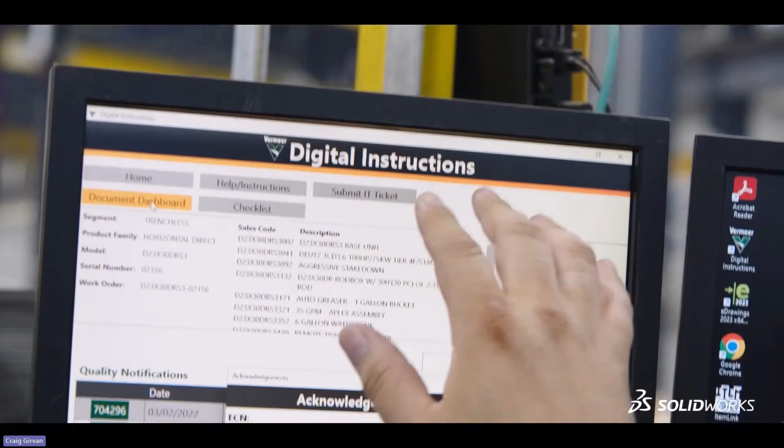When I started, it would have been '89, and drafting boards were the tool at the time at which we created our engineering drawings. Then we wanted to get into assembly drawings, and that's when we got into trouble. 2D collapses and falls apart. We'd have all the parts laid on top of each other, but that was only in one dimension. It's very common to design something up and then find out these parts don't even fit together. So how do we move to the next step? That's when we knew we had to start thinking in 3D.

It became, who are we going to team up with to move towards the next one? It became SOLIDWORKS. SOLIDWORKS was brought on board in 1999. We were the first SOLIDWORKS customer to have over 100 seats of SOLIDWORKS. The speed, comparing 2D to 3D, there's a huge difference there. We had to do overlays because we could only put 32K in one file. It didn't require the engineer to have so much imagination about how parts fit together.

It made the engineering job so much easier. When I saw SOLIDWORKS, I was like, this is going to completely change and revolutionize mechanical design. The ability and the power that has grown with it over time has really been nice, where before we could pull in a few parts, small assemblies, just because of the hardware limitations. Nowadays, I can pull in an entire machine of thousands of parts, and it runs quite well.

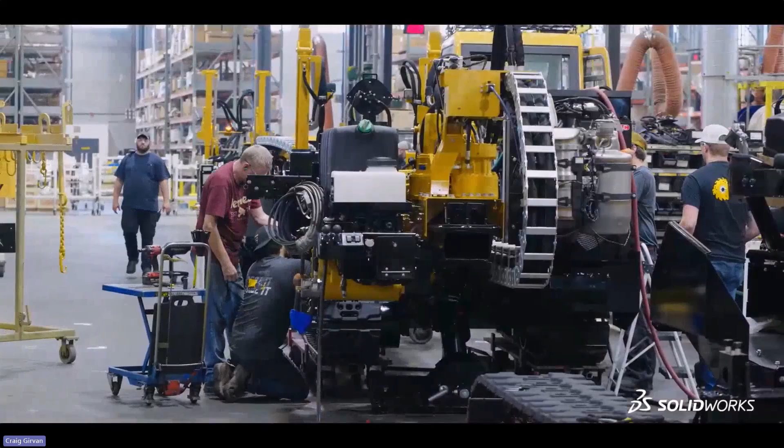We can model things, we can learn how things fit before we build the physical thing, which really accelerates our time frame. And that all was about how we communicate the complexity of our machines throughout the organization. That ability of SOLIDWORKS to bring things older, newer, more quickly, it just continues to accelerate. It allows us to offer repair parts. It allows us to keep designs similar from older and newer things rather than having to do a complete start over.

We can always use some amount of past data to help us with those future things. And now we're getting into the simulation type things, that confidence that if you have a design, you really understand what the loading's going to do to it, how the parts are going to fit together, you understand how they move together. That really allows you to focus on the actual engineering and designing things. Makes the job continue to be fun.

In July of 2018, we had an EF3 tornado. This one didn't stop. This one actually did hit. So we lost, I'm going to say, a third of our manufacturing square footage. And our goal was to actually get back up into production. Part of that was to find different manufacturing locations throughout the area. We were scattered out and about, and we were still able to function.

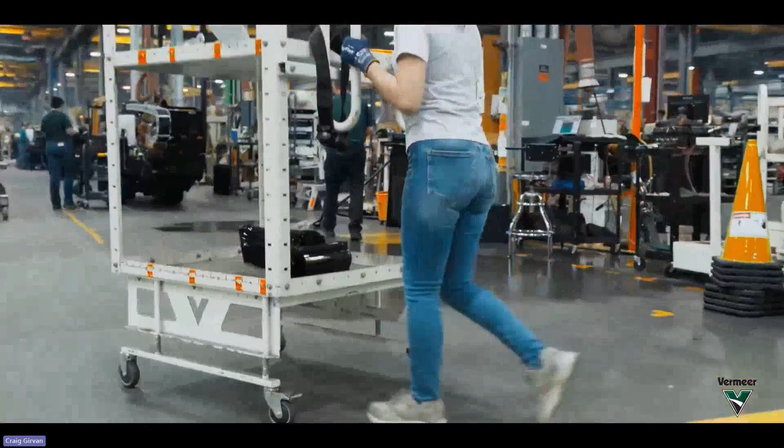We were back up into full production in 60 days. The year of the tornado, we had a record year. The backbone that we put in to run SOLIDWORKS, we were able to run it at any location. The partnership with SOLIDWORKS and Dassault Systèmes continues to grow. We would not be the company we are today without SOLIDWORKS.

It is used for 100% of all our mechanical CAD design, and we use it worldwide. Over the next 10 to 15 years, I expect the Vermeer SOLIDWORKS relationship to continue to grow, to solve new problems, to leverage new technology. The next generation can come and see the work of the past, and then we can keep absorbing and growing our knowledge base as a company.

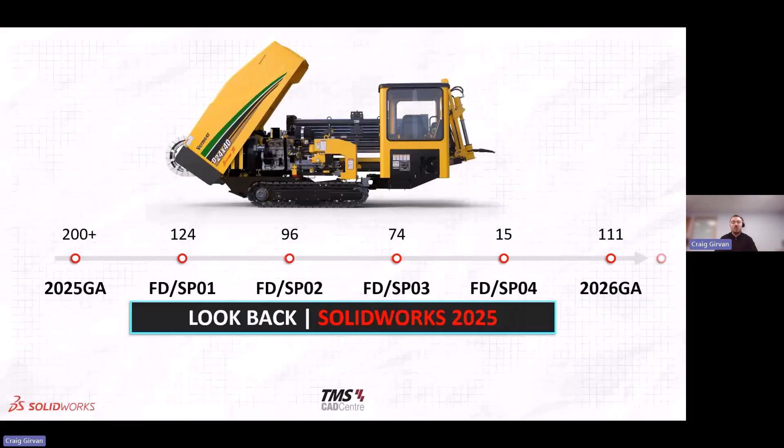For that we'll be using the model we used last year, so you'll be able to tell the difference between stuff added in 2026 versus 2025 - it will correspond to the different models we use throughout. We'll see the Vermeer model, and we're going to start laying things out a bit like a SolidWorks drawing, with a title block at the bottom right, a bill of materials for each section we go through today, and balloons showing what areas of the model we'll use for that section.

So getting started with the first section today, we're going to take a look at a highlighted feature. This was actually added in SolidWorks 2025, but it's one that came with one of the later service packs, so it's something we weren't quite able to showcase during the launch event a year ago when we initially showed 2025 - and that's all around the topic of selective loading.

There are three parts to this feature we're going to look at. First is accelerating the design workflow, particularly with large assemblies. Rather than having to open the large assembly fully resolved, which might take quite a bit of time, we'll see how we can open just a small sub-assembly or a selection of parts, which speeds up the process of opening what we need to edit.

We'll look at using some filtering tools, so we can create filters for those different sections and don't have to manually select them every single time we want to reuse this. And we'll also see how those filters can be used as part of governance, in terms of a workflow and tasks, that sort of idea.

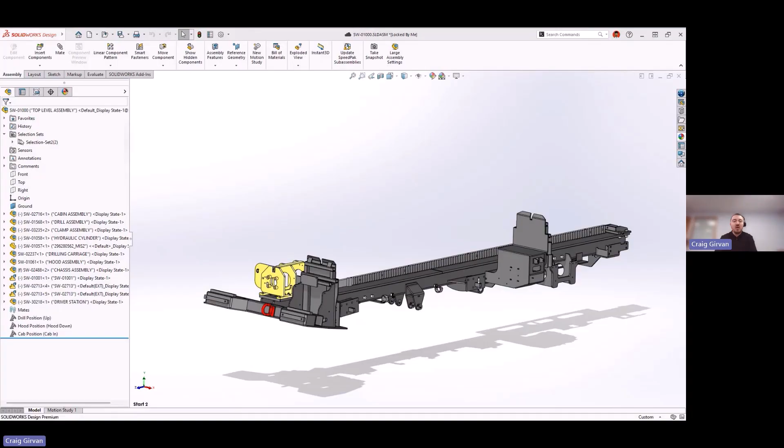We don't want any messages popping up saying we're missing a reference or anything's out of date. What we can do with the 3D Experience platform is create what's referred to as a filter. We can select the components, whether individual parts, sub-assemblies, or a mix of both, and apply them to a filter. That filter we can then also access from inside SolidWorks.

On the right hand side we can search for the name of that filter, and it will then just open up the components that were part of that filter, which makes the opening process much quicker, rather than having to load our whole model, but it won't have any issues with any references missing, that sort of idea. We can also start to apply additional information to that filter.

So we can add any sort of properties or attributes to that filter. We can modify the filters after they've been created. We can create multiple filters as well. And then we can use those filters as part of any collaborative tasks. So with the Experience platform, if we're using any tasks, we can have them included in there.

Same on the right hand side of SolidWorks, if we have our collaborative tasks open up, we can see what kind of work we've got to do, what work's in progress, and even what work's complete. We can link them to filters so that if we're passing that information to a colleague, they quickly know what files they need to open up and can open them up nice and quickly from inside there.

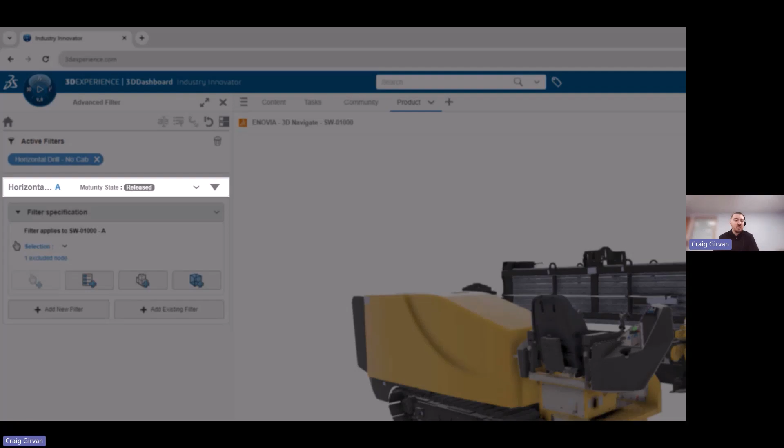And we can start to link them to our files as well. So if we want some kind of traceability to see what filters were maybe used in the creation of a drawing, if we looked at the relations in the 3D Experience platform, then the filter will appear as part of the relations, whether you're looking at a drawing or maybe an assembly. Those will still appear in there together.

So for those of us using the 3D Experience platform, that selective opening can be really useful when it comes to large assemblies and just working on individual components, rather than necessarily relying on things like configurations, which can still be very good and have their own benefits.

What I'll then do for the next section, we'll go through the parts. I'll pass it over to my colleague William, who will take us through that section.

Perfect. Thanks, Craig. So yeah, moving on to parts. We're just going to briefly cover what's new in parts in 2026.

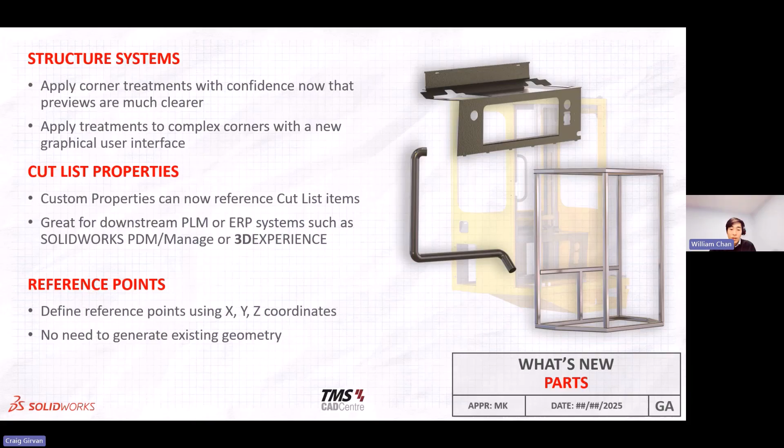You'll now be able to offset sheet metal base flanges from their original sketch plane. You can break both external and internal corners quickly, delete equations that would otherwise cause Feature Manager tree errors. There are also improved previews and user interface for corner treatments with structure systems, and you can leverage cut list properties for PLM and ERP systems, define reference points using numerical X, Y, and Z values, and finally specify bounding box directions using coordinate systems for greater control.

Let's have a look at these in action, starting off with base flanges. Normally with sheet metal, base flanges are extruded from the sketch plane. However, in some cases it might be useful to offset the sheet metal base flange from the plane it was originally sketched on. So in 2026, what it allows you to do is offset that base flange by a specified amount, or by a vertex, or even by a surface, face, or plane. This gives you more flexibility when creating sheet metal parts.

Next is break corners. You've always been able to break exterior corners - just select the break corner tool and select all corners to apply chamfer or filleted treatments. 2026 now expands this functionality to internal corners, making the treatment of sharp internal corners much simpler.

Next is delete with equations. Equations in SolidWorks are used in features and sketches to create links or conditions to dimensions that would otherwise normally be impossible. However, when you deleted a feature containing equations, the equations would be left dangling, causing errors in the design tree. With 2026, you can now simply select the delete equations checkbox to automatically delete those without errors.

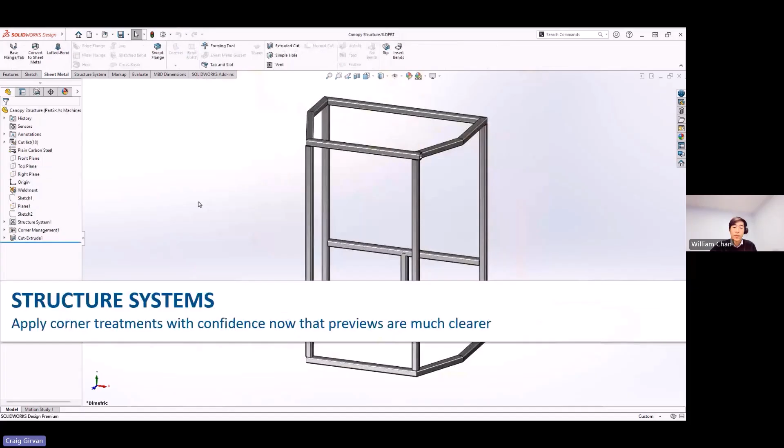Next thing is structure systems. In SOLIDWORKS Design 2026, structure system corner treatments are more consistently colored to indicate the corner type. Now when you select a complex corner to modify, there's a brand new graphical selection pane that appears, giving you complete and intuitive control of the corner treatment with better previews than before.

Next are cut list properties. Cut lists gather all bodies for easy categorization and the creation of your bill of materials. However, maybe it's difficult to access this information for downstream workflows such as SOLIDWORKS PDM, the 3D Experience platform, or any other PDM, PLM, or ERP system. In 2026, it enables you to reference cut list properties such as description, total length, and more within the custom properties, making this information more easily accessible without having to rely on workarounds.

Next are reference points. In the past, you would need existing geometry to create reference points. In 2026, you can now define the position of reference points using numeric X, Y, and Z values. Here we can see they are being used to generate a layout for what would have otherwise been a challenging 3D sketch, which is then used as the path for a sweep feature.

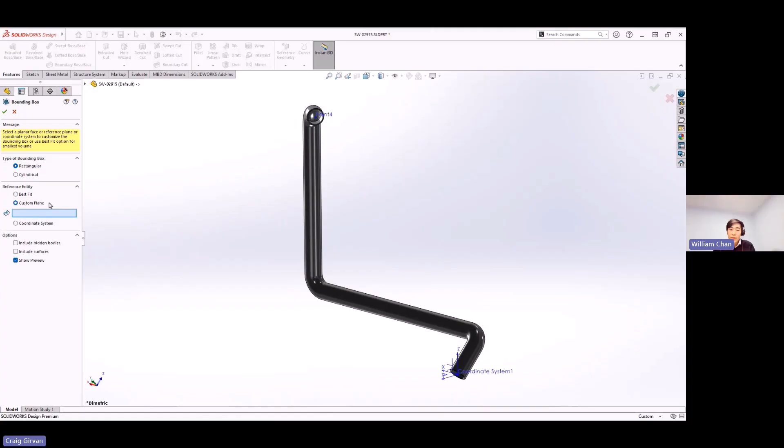Next are bounding boxes. Sometimes it may be beneficial to orientate the bounding box along a specific plane. However, if the part geometry changes significantly, SOLIDWORKS may change the direction, which is defined by length, width, or thickness. So now in 2026, you can specify these directions based on a user-defined coordinate system. That means the defined direction X, Y, or Z will always associate with the bounding box definition. For example, the bounding box width defined by X direction is 33 inches, greater than the length of 30 inches. When we change the part configuration to the shorter length, the bounding box width is now 27 inches, while the bounding box length is maintained at 30 inches, and it essentially did not swap due to the change in geometry.

Now we're just going to have a look back at some of the features that came out in 2025 for its various service packs. In 2025 FD01, we had the ability to set the flange length to a specified vertex, include DIMXPERT dimensions with library features, and add attributes when you create a new SOLIDWORKS file. Let's have a look at these in action.

Starting off with the edge flange. In 2025 FD01, the edge flange tool introduced the option to set the edge flange length by distance to a selected vertex. Selecting the edges of the part to start the edge flange, then using the up-to-vertex option allows you to choose a point on a sketch or geometry. The edge flange no longer requires a dimension value and is controlled by the position of the vertex.

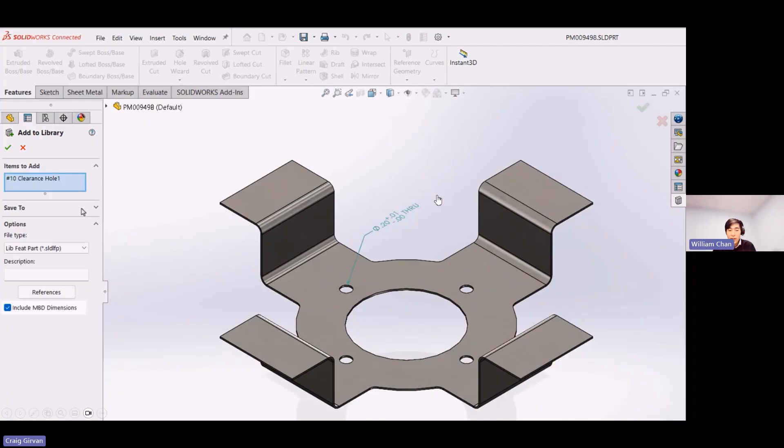Next is adding a design library feature. This now gives the option to include MBD dimensions when you're creating a library feature. This saves a couple of clicks and allows you to essentially reuse that library feature in other models. For example, once we've added this, we can insert it into a model, and we should see the MBD dimensions also appear once those have been inserted.

Next, in 2025 FD01, we have the ability to set a template from the 3D Experience tab, allowing you to enter the value of attributes before the file is created. So here, for example, we can set the description, make or buy, as well as the finish required. These values will populate the file properties and can be viewed in the various 3D Experience platform apps.

Next, in 25 FD02, we saw pinning commands such as the fillet and chamfer tools, the shift key to establish equal length relations, and multi-language support with design tables. Let's have a look at these in action.

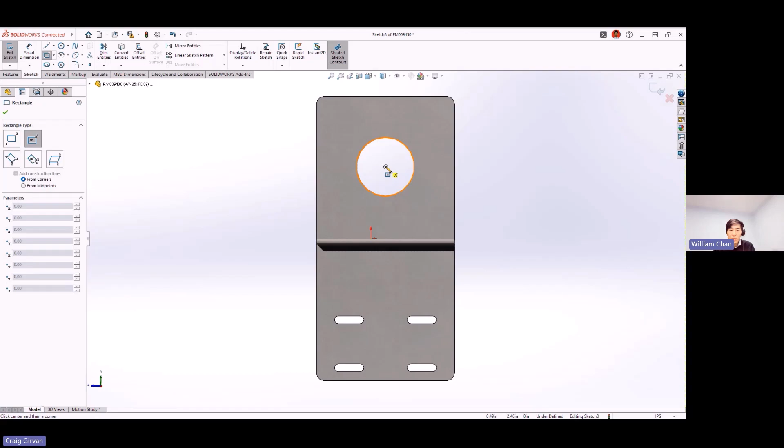Next are sketch squares. Let's first create a sketch and activate the rectangle tool, and sketch out the rectangle. When placing the rectangle onto the sketch, you can now hold the Shift key to establish equal length relations. This creates a square shape and saves you having to apply the equal relations after the sketch is placed.

Finally, we have multi-language support for design tables. If SOLIDWORKS detects the column headers in the design table are in a different language compared to the default one set on your SOLIDWORKS installation, it will display a prompt giving you the option to either translate or not translate the column headers, as we can see here. Selecting the translate option will translate and match the column headers to the same language currently set in the installation. And that is what's new with parts.

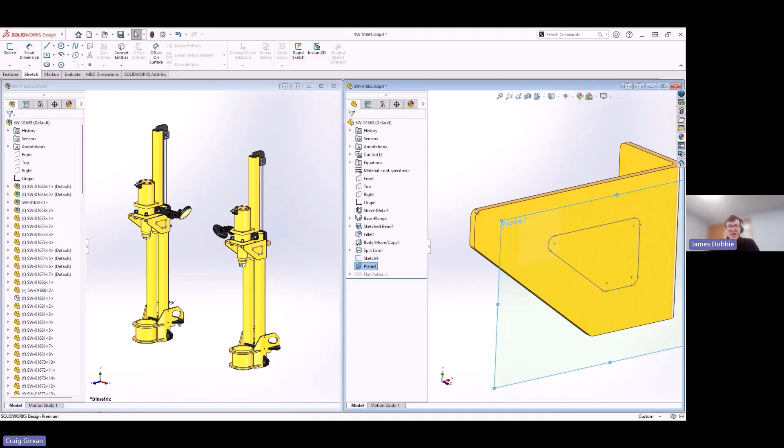When we apply this and make changes to things like the parts within the assembly, it will not mark the assembly as dirty in terms of needing a rebuild and save. In this case, in the part, we're moving around sketch planes which don't require any child features, adjusting the sketches, hiding them, adding appearances, and things will still work. This plane didn't have any child features, so it's not actually changing the part at all. None of this is affecting the assembly, and that's why it's maintaining the square bracket indicator, showing only a cosmetic change being applied.

If we go in and adjust appearances at the part level, it still maintains that cosmetic change indicator. However, if we make changes to the part and then cancel them out, still no changes have occurred, showing that no-change indicator again. So it doesn't necessarily need to be saved when you're finished, saving rebuild and save times on large assemblies.

Next is enhancements to tables, for managing display states and configurations. There are new dropdowns added to tidy up the table by default, such as the reference display state being hidden by default, and configurations get the same treatment. So here we can turn them on and off as required for display states.

In configurations, usually when you add parts it will add three columns: suppressed, configuration, and fixed. By default, it will just bring in suppressed, but if you want access to those other columns, you can add them on, or add and delete them as required. That's the new enhancements to configuration display state tables.

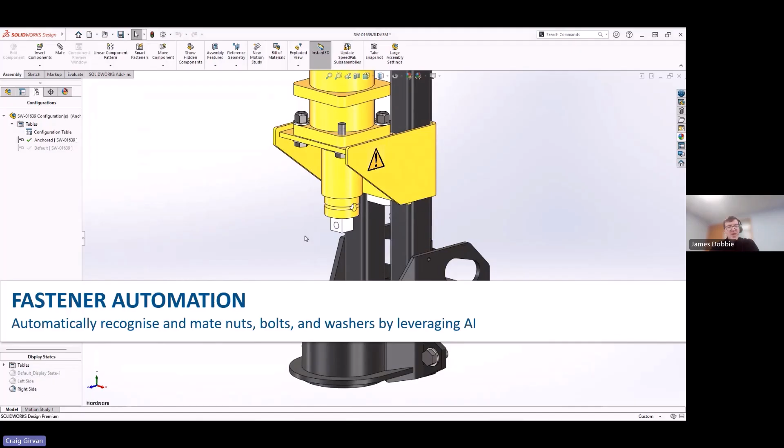Next up is automation in terms of fasteners. This takes parts that are not toolbox parts and makes them behave somewhat like toolbox parts, automatically mating them in position when dragged over appropriate geometry. In this case, the fasteners can just be dragged around even though they aren't toolbox parts, and it also works when dragging them in from outside SOLIDWORKS.

How this works is SOLIDWORKS has been trained on thousands and thousands of Windows preview images to detect what is a fastener, so that's how it knows what a fastener is just by looking at the Windows preview image. So you can drag them in and easily place them if you've got them from somewhere else, like an online website or anywhere else.

That's what's new in 26. We'll now look back to what was added in the various service packs in 25.

So here, the disable auto resolve option in the feature manager tree. This applies when you've opened an assembly in lightweight mode. The previous behavior, which we'll see here, is when you open a sub-assembly, it's then going to resolve that sub-assembly, and if you want to drill down the tree, you might have several resolve steps to wait through.

There's a new option you can disable, the auto resolve option, which will change the behavior so it no longer auto resolves all these sub-assemblies as we expand the tree. If we take a look at another one of these, for example, it is not resolving that, allowing us to browse through our tree nice and quickly. It only loads what's in lightweight, but if any of these parts or sub-assemblies need resolving, we can just right click on them and resolve them.

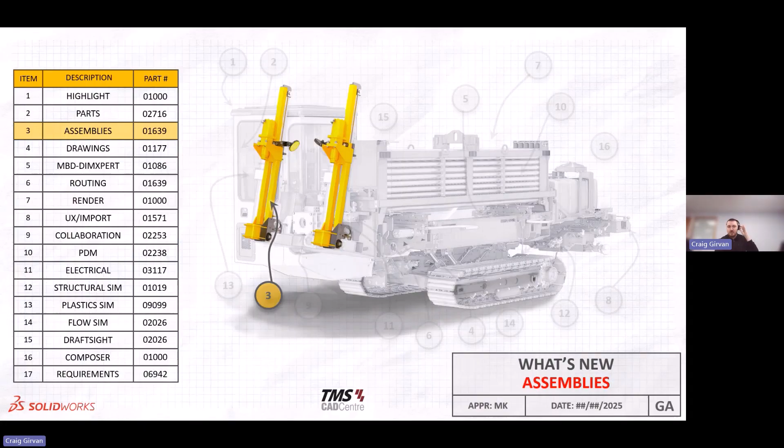So what I'll do is take us through some of the enhancements to the SOLIDWORKS side of things when it comes to the drawing environment. First we'll look at an example using auto-generate drawings, where we'll use a little bit of AI to automate the process of creating drawings, intelligent in terms of where it places things and what it places. We'll then look at enhancements to magnetic lines, where it doesn't have to only be used for balloons, which is what it was originally made for. We'll then look at an enhancement to breaking dimension lines to tidy things up when things might overlap slightly, increasing the readability of our drawings. We'll then look at a change where we can have custom text when it comes to geometric tolerance and the frames and fields in there. We'll then have a slight enhancement to the surface finish indicators depending on what standard you're using.

Having a look at the first example here, we've got the auto-generate drawings. There might be an example where we've got a number of different parts and we need a handful of different drawings created for those individual components. What we can do, using the 3D Experience platform, is have SOLIDWORKS create those drawings automatically in the background. This will appear as a section on the right hand side, and as you continue to work on other models or completely different files, SOLIDWORKS can generate those drawings.

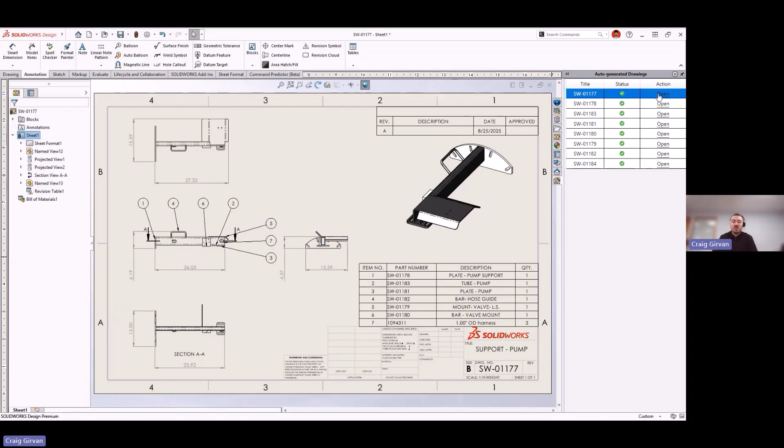Magnetic lines were introduced a number of years ago and were initially created to help with balloons, so we could add balloons to the magnetic lines. However, now with 2026, we can start to add pretty much any of our different annotations in our drawing, whether it be datums, basic notes, surface finish symbols, geometric tolerances, pretty much any annotation. We can attach them to those magnetic lines or pull them apart just as we would with balloons.

The next enhancement is the option to break dimension lines. It's relatively common in a SOLIDWORKS drawing, particularly with lots of dimensions, that some might overlap. But now we can break that, and as we start to move this dimension around, if it would overlap another dimension, it will start to break those lines a little bit. If we add a new dimension, we can simply update, and any points where a line should be broken, SOLIDWORKS can add that broken line in to increase readability and make things look neater and tidier in our drawing.

When it comes to geometric tolerances, if we go in and create our geometric tolerance and place that next to what we want, we'll see a wizard where we can add the various steps. We can then start to add our different frames, so we might add additional frames for our three different datums, but now we can add additional text linked to that geometric tolerance. Here we've placed some additional information below, which could easily be placed above or to the side. It just allows us to add some additional text, whatever we want in there.

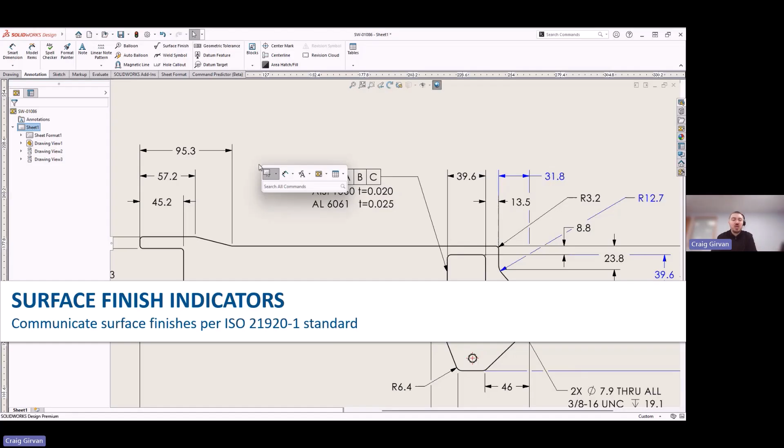We also have a change to the surface finish symbols. Based on our new option here, we'll have a new option to choose the standard for our annotations for surface finishes. From the drop down, it's been updated to a slightly newer standard, so we can select that from there, and when we go to add any surface finish symbols, the symbols shown will be updated and we can use the new options available.

So we can add that there, and then we can attach that to where it should be placed. It's just an update to the options that we've got based on some updated standards inside SOLIDWORKS.

What we'll then look at is a couple of enhancements that came with SOLIDWORKS 2025.

With FD01, we had an option for flattened bill of materials, where we can show the total quantities for those. The bill of materials can also be affected by the display states if we're using them, so if we have anything hidden out. And then we have a new table type called a family table that we can add in.

Having a look at the flattened BOM, here we've got a couple of components that are currently indented, in terms of having a kind of 5.1, 5.2. If we change that to the flattened option, it will not only flatten it so we don't have the .1, .2 and increase the numbers slightly, but it'll start to see how many of those components are in any of our assemblies anywhere, and include the total quantities of those.

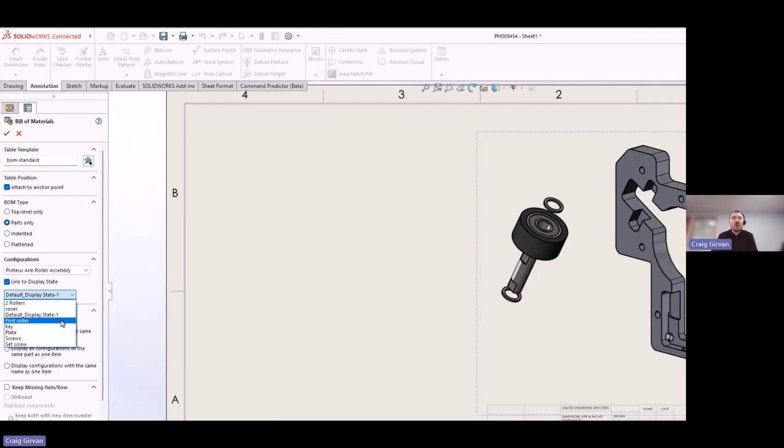If in our models we have display states, we could select a different display state which will hide out a couple of our components that may be created in our assembly. When we now go to create our bill of materials, we'll have an option to link that bill of materials to a display state. That way it's not going to try and add in rows to the bill of materials for any components that are hidden out in that display state, which subsequently means if we added in some balloons, it's not going to add in any additional balloons that might have a little question mark or star but doesn't know where to put the leader line. That's a nice option there.

What we then have is a new type of table referred to as a family table. In this part we've got 4 different configurations, and those have slightly different diameters in this case, but it could be different lengths or really any dimension that's changing. If we come to our drawing and insert our family table, it will add in a row for each of the different configurations, and any time there's information changing, it can have columns for that. So in this case the length and diameter are changing.

Technically in the background, we also have a part number assigned in the configuration properties, and the configuration properties have a different description for each of those as well. So we can just have columns shown for it, which can be a nice easy way to show all of different information from our tables.

With FD02 we had some changes to the cut lists. We also had some display expression changes in terms of visibility and how we can hide and show certain stuff, and an enhancement to revision tables.

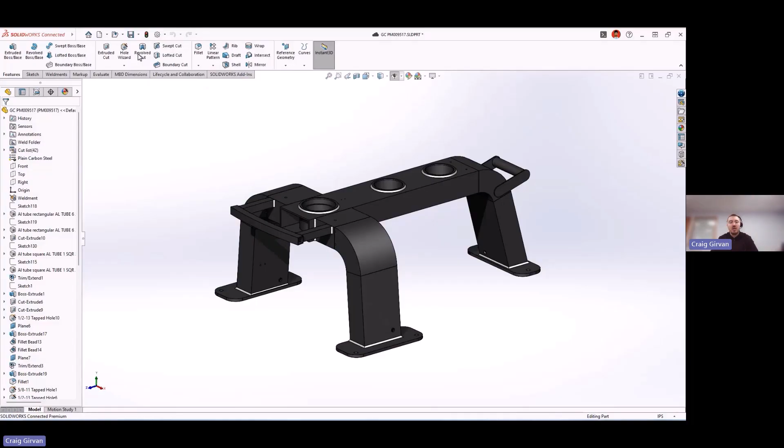When it comes to weldments and sheet metal, we normally have our cut list. In here we've got a number of different lengths, but depending on what units we use, you could have ended up with a table where some units are shown in millimeters, some bits maybe shown in inches, or centimeters. But here we'll have a new option where we can say to always use our document properties and the units that are part of our document properties.

That way, when we go back to our drawing, any information that we've had from cut list IDs will match what the length is. So we've got the same units being used throughout the drawing, so we don't have any discrepancies there. Also, we have some changes to controlling the visibility of some annotations.

So what I've got down here at the bottom right is part of our title block. Normally we might have various different notes in there, but without editing the sheet format, it might not be possible to see if there's actually a note in there, or if it's just that I've not put in who drew the file or when, or if the note's kind of broken and someone's deleted it. With this new option, we can show in the drawing if there would be a note in there, depending on whether we're pulling information from the model or from the drawing, or if it's a $PRP sheet property, it will start to show us. Then we can look at where that's pulling from to see the reason for any information being blank.

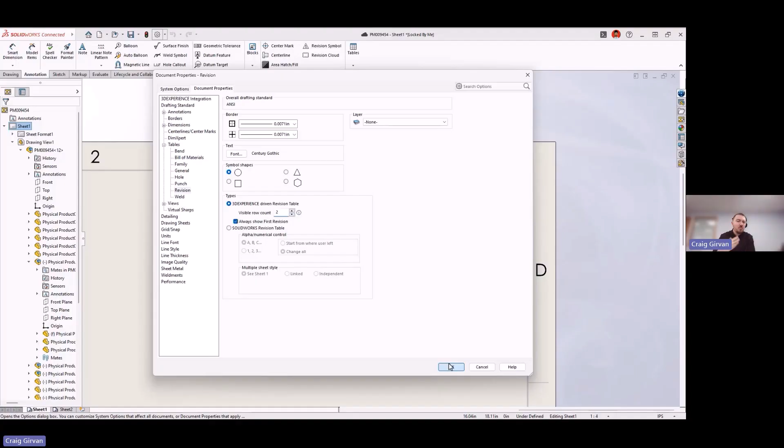We then have an option for the revision tables side of things. This option is specific to those of us using the 3D Experience platform. We can have the revision table always show a row for the initial revision, so we can say always show the first revision, and we can control how many total rows we want to see. In this case we see A, because that was the first one, and if we're only showing 2 maximum, we'll have that first row plus whatever the latest revision is, which in this case is E, which could then change to F and so on. A nice wee enhancement there.

I know a couple of our customers had actually been asking for that.

For the next little section on MBD, we'll stick with myself. We'll look at a couple of wee changes to the MBD side of things, which will more closely match what we're familiar with in other areas of SOLIDWORKS when it comes to hide and show annotations, and we'll also have a little change to the filters we can use for those annotations.

So with our part here, we've got a number of different annotations added in. We can hide and show those annotations in the same way we could in, for example, a SOLIDWORKS drawing. When we select that hide and show option, anything that's been hidden will be shown in a light grey colour, and simply clicking on those will re-show the annotations. That's where we more closely match what we're used to with drawings.

If we wanted to create an MBD, model-based definition, we can also start to use filters. If we change on the left to our DimXpert tab, we'll now have a filter option where we can type in the name of an annotation or a type of annotation. For example, we could search for the start of the word radius and get any of those values appear, or type in the word position to get any of the position annotations we've added in. So just two wee simple enhancements there when it comes to the MBD side of things.

So what I'll do is pass it over to my colleague, who will take us through the routing side of things.

Perfect, thank you Craig. So I'm going to now take you to routing. In 2026, for routing, we have an improved and streamlined user interface for pipe and tube coverings, which now has reusable favorites and the ability to use sketching as routing guidelines for auto route. Then finally, enhancements to drawings where views, tables and annotations can automatically adjust when the sheet format has changed.

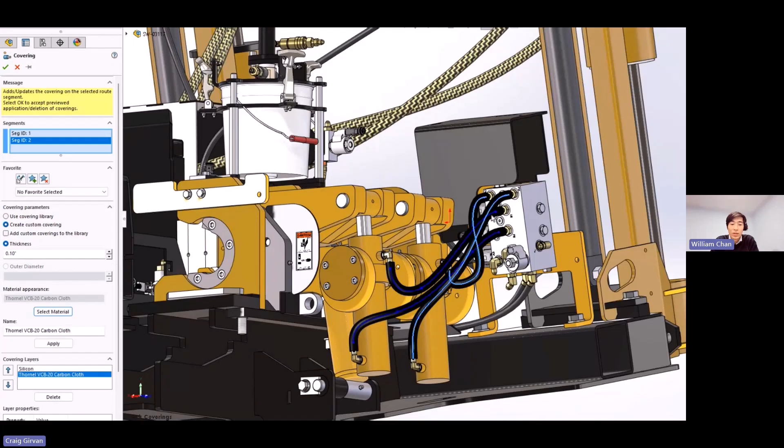Let's have a look at these in action, starting with the streamlined user interface for pipe and tube coverings. By editing the route and using the coverings command, you can apply either the out-of-box layers or create your own using the materials library. Once you've defined the cover material and layer thickness and applied it to the segments of the route, in 26 you will have the ability to save that as a group using the favorites drop-down menu in the covering property manager. This makes applying covers easier than before, allowing you to reuse the same settings and apply them to other existing routes. For example, we can edit this existing route, select the hoses, and then use the group named Vermeer that we just created.

And just select that from our favorites drop-down menu.

Next is sketch guided auto routes, for electrical routing. With an assembly of this scale, and like in many similar assemblies with a variety of motions, it's important to keep the wires, cables, and harnesses neatly organized. As you all know, we have the auto route functionality, and it does save a tremendous amount of time.

In 2026, with the auto route tool, we now have the ability to use guidelines to follow a sketch that defines the path of the route. With the electrical components and connection points established from a from-to list, we can create a 3D sketch that drives the route, and then use that guideline option to follow the sketch, which helps organize the wires, cables, and harnesses within that route.

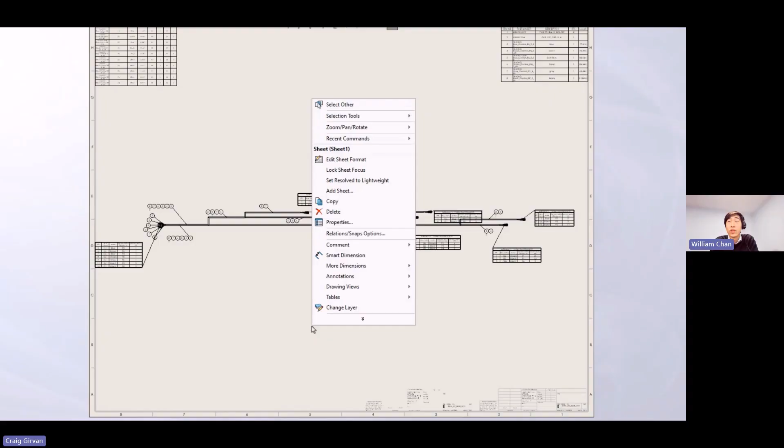Finally, we have sheet formats with routing drawings. When detailing a flattened electrical route, it is often necessary to adjust the size of the drawing. There might be many tables, annotations, and dimensions, and we may run out of space within the drawing sheet. This is often done by either rescaling the views or adjusting the sheet format to a different size.

In 2026, we can now navigate or switch to a different sheet format while the drawing maintains the proper size and ratio of all views, tables, and annotations. Everything shifts proportionally. We might just need to move some items around to adjust to the new sheet size of the drawing, but we don't have to modify the scales.

And that's it for routing. I'll now pass you over to Craig.

Alright, thanks for that, William. What I'll do is take us through a couple of enhancements when it comes to the rendering side of things. You might notice the topic here just refers to it as rendering rather than necessarily visualize, because some of the enhancements we'll look at aren't necessarily in visualize.

So we've got some changes inside SOLIDWORKS to use the DSPBR appearances that were previously added into visualize. We'll now also have an option where we can start to actually create visualize renders inside the SOLIDWORKS application itself. And for the visualize side of things, for those of us with AMD graphics cards, we'll now have the kind of stellar fast mode, which can help keep things looking the way we want, but also with improved performance.

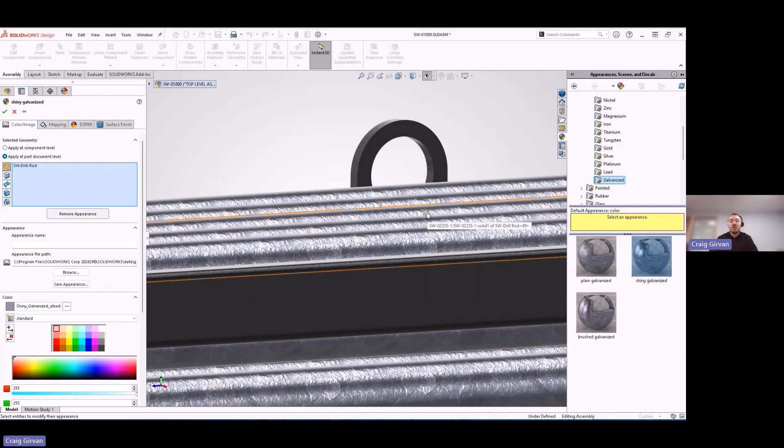So first, when it comes to the DSPBR appearances, these were added into visualize a couple of years ago, but now we've got them inside SOLIDWORKS. So what we can start to do is, as we apply our various different appearances, or if we apply a material, all our materials in the materials database in SOLIDWORKS come with appearances as well. Those have all been updated, so that when we look at things, they should start to look a little bit more realistic, which can give us some better visuals.

But taking those visuals, if we were to try and take just a snip of those, it's still maybe not the ideal option. So that's where we'll start to use the second enhancement here, where we can create renders inside SOLIDWORKS. Some of you a number of years ago might have been familiar with PhotoView 360, which stopped being supported really from 2017, so a good number of years now.

What I've got now inside SOLIDWORKS is the visualize render side of things. So without leaving the SOLIDWORKS application, we can apply all those DSPBR appearances, maybe add a couple of bits of lighting, maybe add a scene in the background, and then start to get much more realistic images that we want to put on our website, use for marketing material, or maybe send to a client to show what their model would look like.

And this is kind of one example of one of the results that we could get from there. So that's something that can definitely help, I think, a lot of customers, rather than just using the window snipping tool, which I think a lot of people still use.

Last enhancement here we'll look at is the stellar fast render mode. For those of us that had NVIDIA graphics cards, we'll maybe be familiar with this. Obviously those of us with an AMD graphics card will now have the render mode at the top, where we see the little yellow circle at the top. That means we don't have to use the fast mode, which then you would see all your cameras and some other stuff, and things won't necessarily look the best in the fast mode.

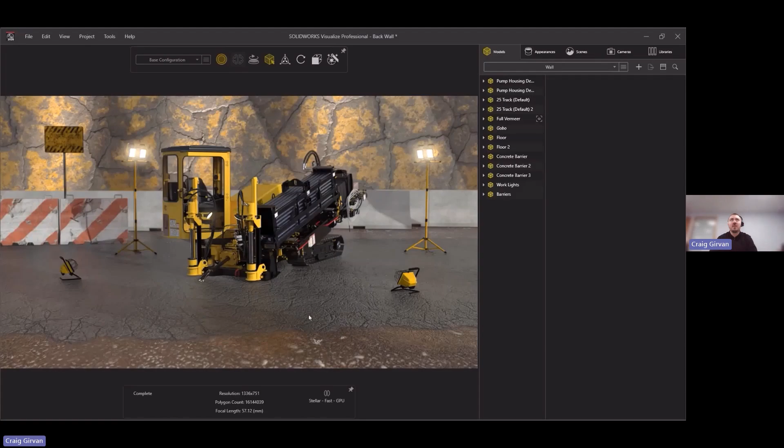You also don't need to go all the way to the accurate mode, where everything's fully rendered and therefore a bit slower. We have that middle ground which can help with the setup, and then you can do your final render at the end. So that's a couple of enhancements when it comes to rendering with SOLIDWORKS.

The next section we're going to look at is the user experience and import. First of all, a new option here is to import models in a background process. So if you've got a lot of neutral files, rather than locking up SOLIDWORKS while you're importing, you can have those import in the background, and once they're ready it'll give you a wee notification to start using them.

There's also been improvements to the filters. This is where you can bring up the filter selection in terms of edges and vertices. You now have options for components and features as well to make selections. So let's take a look at those and some more.

There's also options for selections, such as body selection filtering by things like size or within a defined volume. The warning messages that you get at various times when you've got errors or other issues opening files - if you have previously dismissed them, there'll be a wee pop-up in the bottom right if any were to show up. And there's also been improvements to the rebuild performance for more complex assemblies.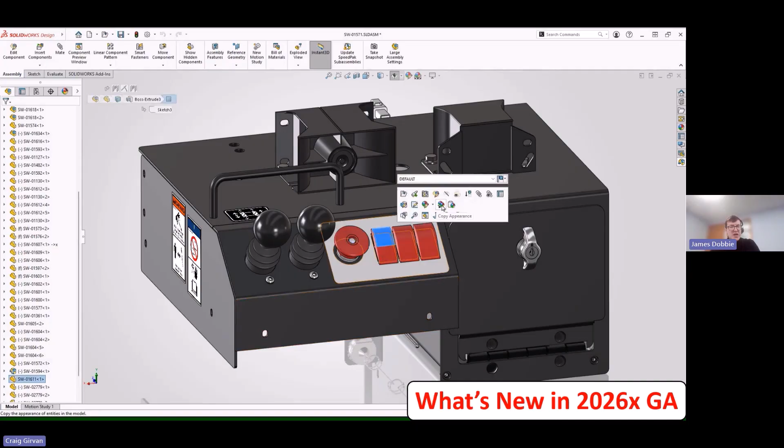Now in terms of if we want to select these joysticks and buttons, we want to apply appearances to them. Let's say we want to apply the red appearance to the entire component - previously we'd have to select that component, then go into the appearance options and make sure we select the entire component. Now what we'll be able to do is just filter for the component selection, and by selecting this will pick either the top level subassembly, or if the part is just in itself, the whole part, and we can apply appearances and other options much quicker by that filter selection.

It's the same in parts with features as well, which we'll look at next. Just that filter menu you can bring up with the F5 key. So we'll look at the same in parts now.

So opening up this part here, the new option for features - it might be a case that you want to make a selection on features to either apply appearances to, or to suppress or delete features. Rather than having to hunt them out in the design tree, you can now directly select them with the filter feature button in the feature selection. So it just makes selecting things a wee bit easier.

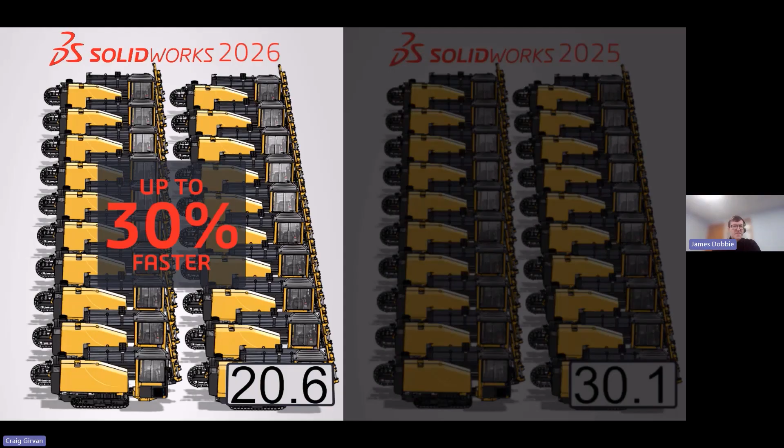There's a new warning pop-up when it comes to working across multiple different resolutions and scalings. So if you're opening SOLIDWORKS previously on a different monitor than the main one - let's say you've got a laptop and a 4K display - then a lot of the icons can appear quite small or quite zoomed in, depending on what you're doing. And this can cause a bit of confusion on what's going on, so this warning will now let you know what's happening in terms of the scaling behavior.

And then how to fix it, whether you want to move SOLIDWORKS onto your main monitor, or open up your Windows settings to change what is the main monitor and then use SOLIDWORKS on that one. So in terms of whatever your main monitor is, that's what SOLIDWORKS will scale to. It's just a wee warning to let you know what's going on with that one.

Let's look at some of the enhancements that came during 2025. First, there's a new option for a simplified interface. SOLIDWORKS can have a lot of options, so there'll be a new drop down where we can select a simplified interface. Whether you're starting with SOLIDWORKS or you just don't need all the extra commands, we can filter it down from there.

Reloading from the server. Previously you were only able to reload models from the local disk, but now there'll be an option, if you're using 3D Experience, to reload from the server.

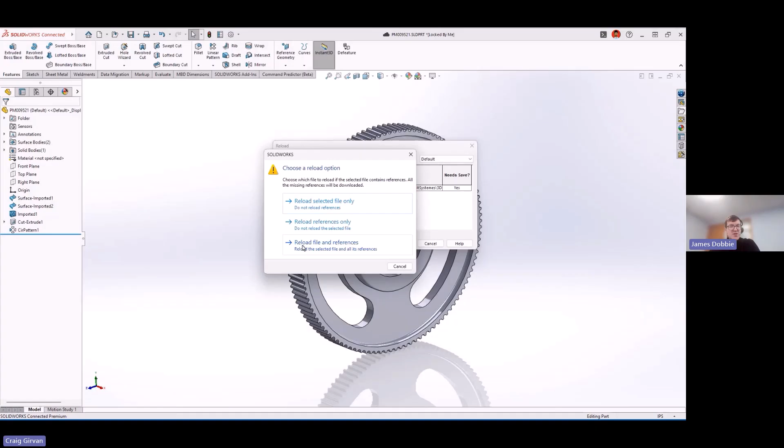Reload from server. If you've got all your files stored in the 3D Experience platform and you want to reload — basically a close and reopen operation — here we can just go to reload and pick the option to reload from server, then choose either just that file or also all of its references. So if you've been making changes locally and decide you don't like them and want to revert, you don't need to close and reopen. Or if your colleagues have saved new versions to the platform and you want to pull them down, you can easily reload again rather than closing and reopening.

The component displacement warning — here we can see it in action. In this case we've got two parts, and we move them what looks like a small distance, but actually one of them is displaced a lot further in different directions. So there's a little warning for that, which we can undo, just to save us scrolling around our whole model trying to move that back into position. A nice little enhancement there.

Some other things that have been added are in terms of additions to command search, recent documents, and the unplanned offline mode. Let's look at these in action.

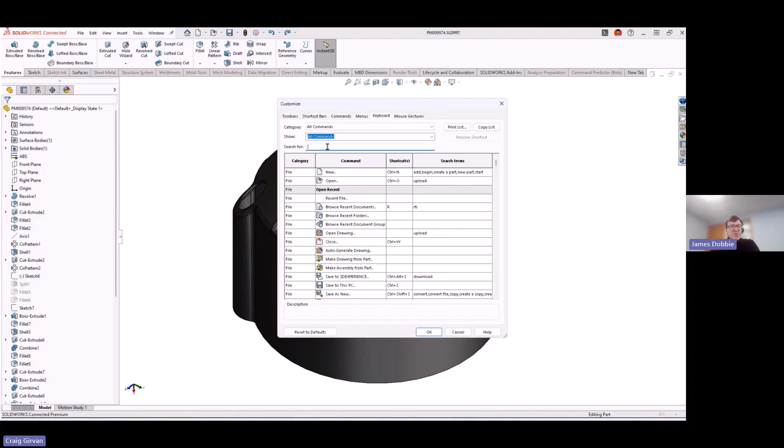Command search has always been available to easily find commands throughout the menus, but now you're able to add custom search terms to these. For example, for save as new, one of the terms we can also search is convert — so we search convert, and save as is right there for us. By searching that we can access the command. Handy if, rather than remembering the exact name of the command, you want to give it a custom name you can search for instead.

Here we might want to add a file type — if we always want to export files as STL, rather than having to search and remember it's 'export', we can just search STL and there's the export command for that one. Nice and easy to add or use any of these custom keyword searches.

Recent documents: if you have access to multiple platforms, the recent documents tab on the SOLIDWORKS home page will now be specific to the space you're operating in. So if you operate multiple spaces or platforms, it'll be specific to those, and you'll no longer see a mix of different files from different spaces or platforms.

The unplanned offline mode - this is where if you lose connection while in SOLIDWORKS, you'll still be able to continue working. There are also options for this, so we'll take a look.

Already added is the ability to go offline and use your license offline with SOLIDWORKS, the named user SOLIDWORKS from 3D Experience. Now if we're working and we lose connection, we're not going to lose work or anything - we'll still be able to keep working.

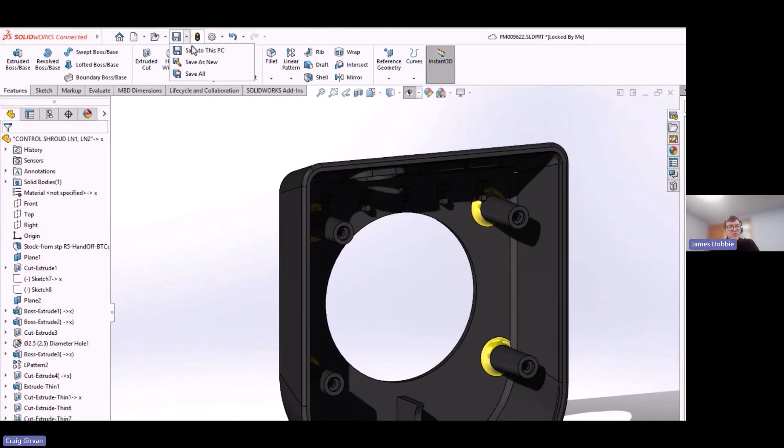When we save it, it'll just save locally because we can't connect to the platform. Once we get connected again, we'll be able to save that back to the platform. It'll prompt us to work offline, and we can continue working with no interruption. If your internet goes down for any reason, you're not locked out from using it at all, and once we regain connection, we'll be able to resave that back to the platform.

So in this case, when we get the internet back, we just need to relaunch SOLIDWORKS, and that will initiate the connection to the platform. We've got all those changes saved locally, and we can then just save those back to the platform to synchronize it back to everyone.

The tree display - at the moment, for every part in an assembly, depending on their configurations and display states etc., they can have quite long names in the tree. There is an option for each component to set a different display for this. Obviously some people might have their own preference of what they want to see - they might not want all that extra information.

So there's a new system option to override the specific component setting for the display of different names in the tree. With that override, it will shorten them to whatever you pick as the default. If you want to see more information, you can add that. If you want to see less, you can override it with less as well - so you've got that option.

Now when you are overriding it, you won't be able to set the component level specific one. So if you do want to adjust the component setting, you need to turn your system level override off for that.

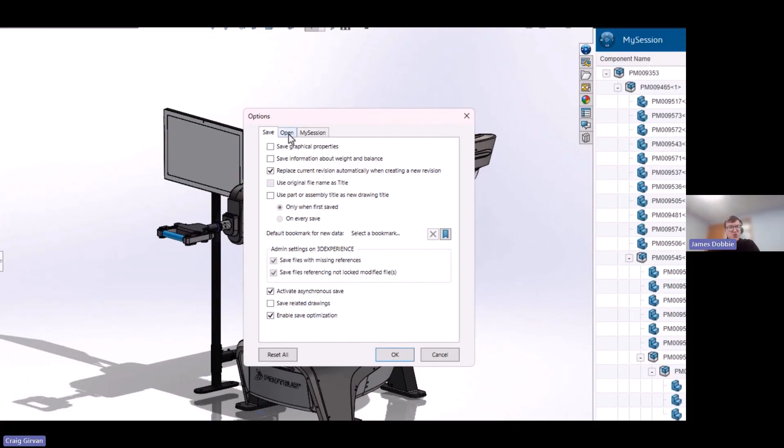Large assembly performance - similar to navigating the tree in lightweight mode within SOLIDWORKS, it's the same in the My Session pane. Previously in your My Session, it would just load all of the metadata in one go in terms of the file structure. What you'll now be able to do is turn off the option for the refresh, which is the same as the lightweight resolving of the structure.

Here, it will just load the top level structure and only load that extra data when you expand it - behaving just the same way as the new option for your Assemblies design tree.

The unplanned offline mode also applies when you launch SOLIDWORKS. Rather than losing connection mid-use, if you launch it and it can't connect to the platform, you'll get up to 30 days of working offline until you next reconnect. Handy if you start your computer and don't have internet access - as long as you've got that desktop shortcut, you can still use SOLIDWORKS. So there's no need to worry about that.

So that's us with the import. I'll now pass it across to William, who'll look at the various new enhancements to collaboration.

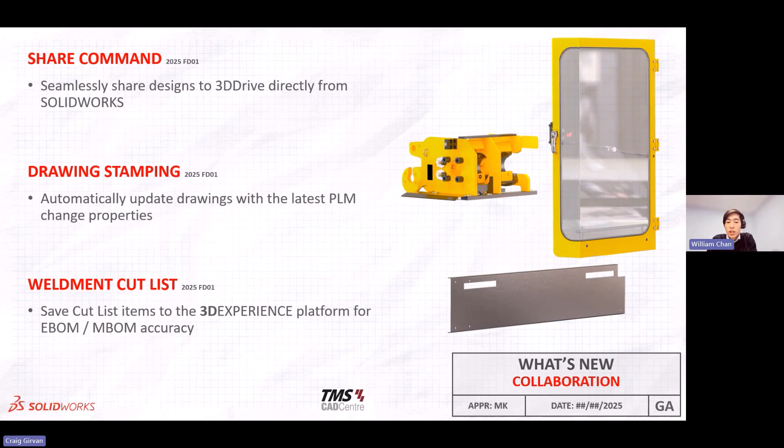Many of these features came out within the 2025 FD releases, starting off with Aura, which is an AI virtual companion. We also have saving configurations as a new file on the 3D Experience platform. You can now access the user forums directly within SOLIDWORKS. There's now a share command within the file menu. You can automatically update drawings with the latest PLM change properties, save cut list items to the 3D Experience platform, store an externally linked design table on the platform, and we also have deformable components as well as automatic refresh of file location bookmarks.

We also have 3DSwym integrations, Office document routing, and streamlined bookmark navigation. And finally, we can now organize conversations into customized sections, add comments to file iteration saves, and smart components are now supported on the 3D Experience platform.

Let's have a look at these in action then. First is Aura, which is your AI companion. You can quickly summarize community posts, questions, and ideas to capture the key takeaways at a glance. So here we can generate a summary of this post, and this gives us the key takeaways there.

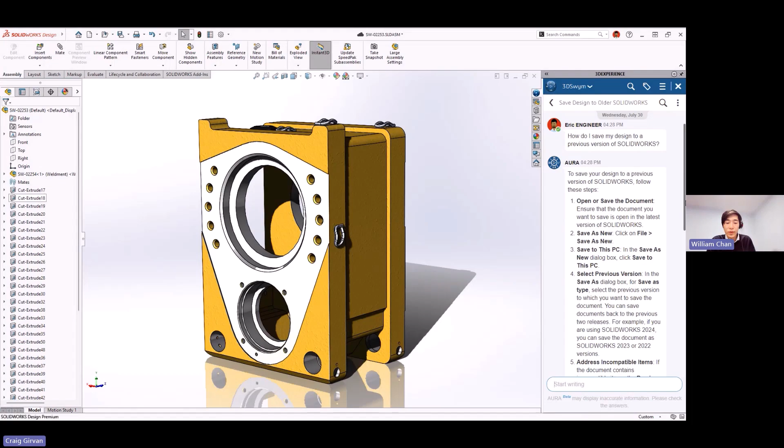Within SOLIDWORKS as well, in the right-hand task pane, you can access Aura to ask questions, and it will pull information throughout the knowledge base, user forums, and official SOLIDWORKS documents. So if you're not sure on something, you can ask Aura and it will try and find the answer for you.

Next is saving configurations. With 2026, you can now save configurations as a new individual physical product. This allows for greater flexibility in how you structure designs and provides full control over managing the associated references when saved.

Next is the share command. SOLIDWORKS makes it easy to seamlessly share your designs, and we've now moved this to the file menu.

Okay, next is connect with peers. The SOLIDWORKS community is the best in the industry, and the user forums have always been a rich source of information and help for everyone. Now you can access the forums directly from the SOLIDWORKS task pane, making it easier than ever to access the knowledge of the user community. You can get valuable feedback on your questions, learn from others, and participate in sharing your knowledge and insights.

Next, the share command. SOLIDWORKS design makes it easy to seamlessly share your designs right from the file menu. You can choose from an extensive list of standard formats such as PDF, STEP, STL, and IGS, and ensure security by controlling who can access your shared designs.

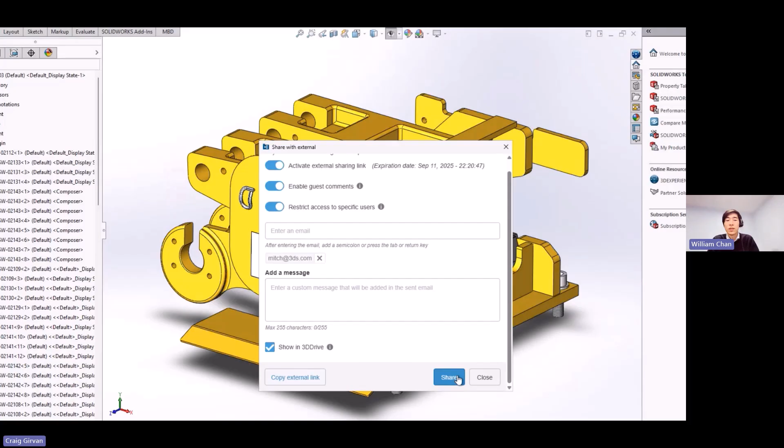Next is drawing stamping. Usernames, approval dates, and maturity statuses are all important parts of the change process. With SOLIDWORKS 26, drawing stamping now happens automatically within the drawing file as each change action is completed, providing a final drawing that's complete and accurate.

Weldment cut lists. SOLIDWORKS now provides support for saving weldment cut lists to the 3D Experience platform. As you save your design, simply indicate that you want the cut list items published. Weldments that contain structural, sheet metal, and plates are all supported. Once saved, the cut list items are reflected in the task pane and accessible on the 3D Experience platform, allowing you to build a more accurate engineering bill of materials.

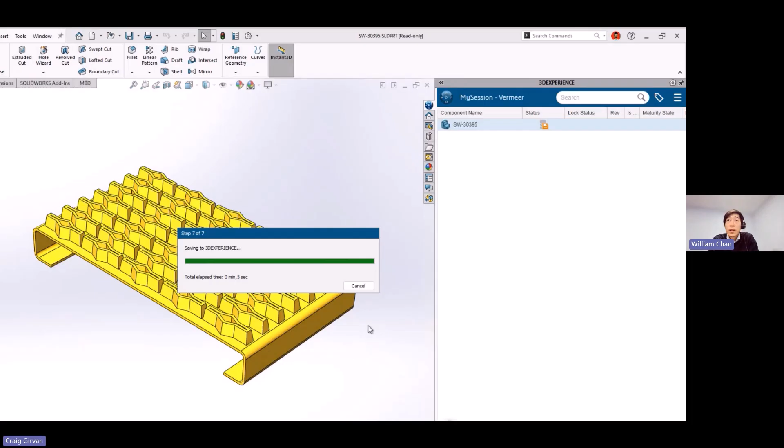External design table support. Design tables have always been a powerful way to create multiple configurations, and linking to an external design table provides convenient access to automating those configurations outside of SOLIDWORKS. Now when you save your components to the 3D Experience platform, the external design table relationship is recognized. In addition to being stored with the part, you have full visibility to the reference relationship between the two items of the design table and the part, ensuring complete design management.

So if we navigate to the Relations app of the file here, we can now see the external design table shown as well.

Next are the deformable components. Purchase components are a key part of any design. These components, such as this gasket seal, are normally bought in bulk and then assigned a part number, and this can be deformed into their installed state.

In SOLIDWORKS, you can now identify a component as deformable. To ensure proper traceability, you can associate the installed state component with the purchase component by searching for the part number and selecting from a filtered list of deformable components to match your search. Once you associate these two parts together, they essentially share a part number, and this ensures full traceability when you search for the part number within the search bar.

Next is bookmark updates. SOLIDWORKS now provides the ability for file locations that reference bookmarks to automatically update, ensuring that you always have access to the latest content.

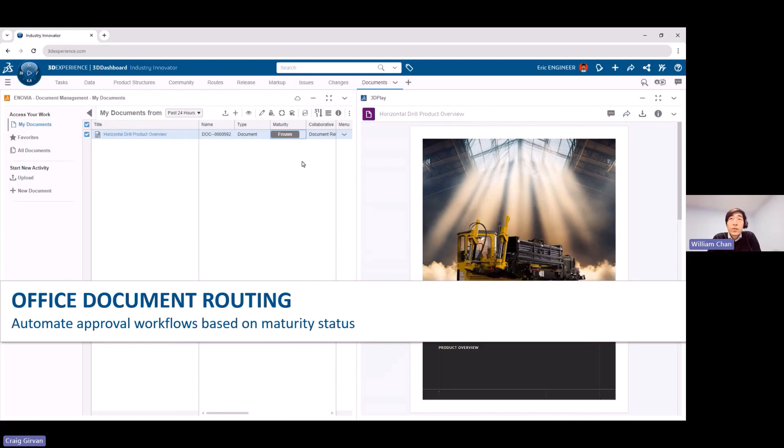Office document routing. Ensuring the right people in your organization review and approve a document is an important part of a release process. Now you can automate the start of a route to ensure the right people get notified for review. Once the approvals are complete, the document is automatically transitioned to release, as shown here.

Next, improvements to bookmark navigation. Bookmarks are a unique way of organizing your content without duplicating it in multiple locations. Now it's easier than ever to see all the bookmarks that are referencing a design, and you can choose which bookmark to open, making accessing your content easy and efficient.

Conversation groups. Chat is the modern way we communicate nowadays—it's quick, convenient, and timely compared to traditional emails. Now you can create custom groups within conversations to clearly organize your chats, making them easier to access.

Next are iteration comments. In 2026, you can now create iterations as well as provide comments to describe what has changed. Simply indicate that you want to create a new iteration during the save of your design, and then add a comment to provide additional clarity describing the iteration. These iterations can be accessed at any time, providing a convenient way to get back to an earlier state of your design.

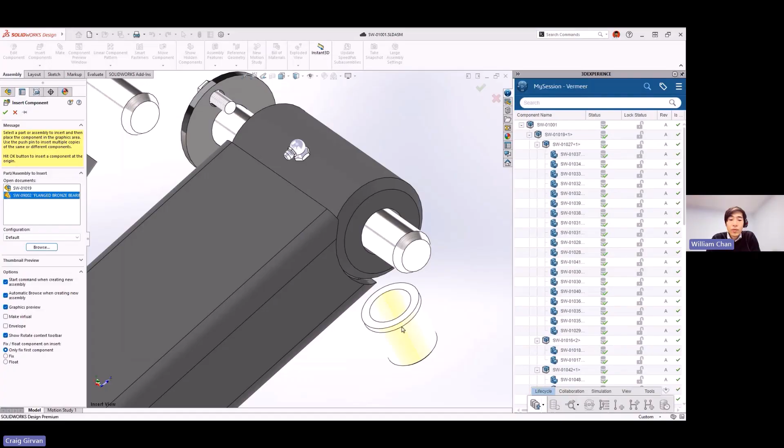Finally, we have smart components. Smart components have long been a powerful way to standardize and automate the creation of features associated with a part. In 2026, components can be fully stored on the 3D Experience platform, making them conveniently accessible to your whole team. When these associated features are added, it saves you time, ensuring consistent accuracy every time the component is used.

And that is what's new for the collaboration section.

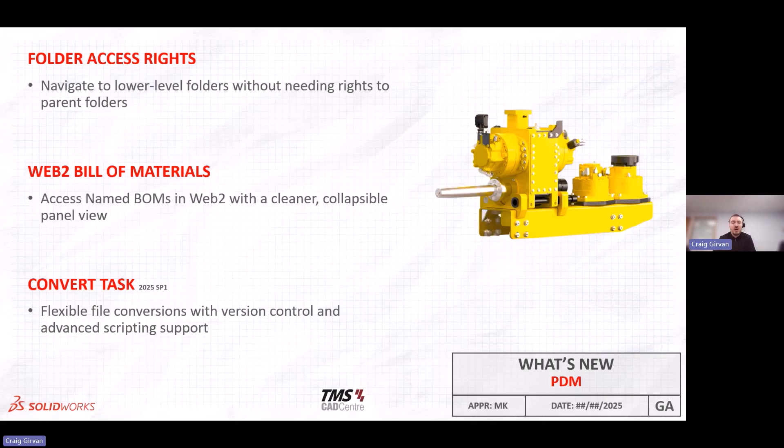We have changes to permissions when it comes to defining permissions on a folder basis, letting us change them for subfolders or lower level folders rather than necessarily giving access to all of the parent folders. We have enhancements to the bill of materials inside the Web 2 client, and enhancements to the various convert tasks inside PDM. And there's also a change to workflows, letting us archive older workflows we no longer wish to use but are unable to delete.

Having a look at the first change here when it comes to the integrated search: if we start to run any of our searches here, we've got our favourite search. We can start to customize that if need be. From our dropdown we can see any of our favourites, and we can customize them rather than just running them as is. Let's try running some of those as well.

If we select the option at the very top, we can say whether or not we want to run that as soon as you click it, or leave it blank so there are maybe no results until you hit the run command—allowing you to take that favourite search, tweak it ever so slightly, and then actually run it, rather than running it straight away as before. This is particularly useful if you've got complex searches with various different criteria, rather than just a single search criterion.

On that topic of searching, we now have changes when it comes to the wildcard side of things. In the setup of the data card, in the card editor, we have an option to change that to be an exact search or an implicit wildcard. That way, when you type in a couple of words, it doesn't have to match those exact words—it might just have one part or a couple of those words in there. It's particularly useful if you're searching for things like descriptions, where you might not know the full description but know some of it. This can definitely be helpful.

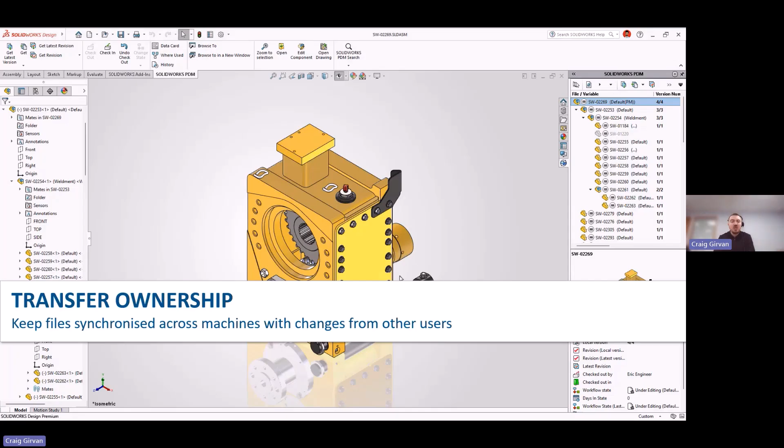Quite a big change here is the option of being able to transfer the ownership of a file.

So there'll be cases where you might check out a file and then decide to make some changes. Here we're just suppressing out some components, and then you'll be saving regularly. This is just hitting your normal save button, which saves those changes locally on your own machine.

If we jump over to a different user, we can see the file is still checked out by the initial user, but we have this new button called Transfer Ownership, which transfers the file so it's no longer checked out by Eric, it's now checked out by Megan. Previously if we tried to do anything like that, we'd most likely be losing any of that work Eric has done. However, this transfer ownership option will keep any of those changes Eric has done.

Even though he hasn't technically checked in those changes, it will be periodically checking in the files silently in the background, meaning that if Eric goes off on holiday for a week or two and forgets to check in a bunch of files, we're not struggling to think, well, do we revert to a previous version, do we undo checkout or something like that? We can now use this new option to transfer the ownership to someone else while keeping those changes in place.

So something that I think a lot of PDM customers will find extremely helpful.

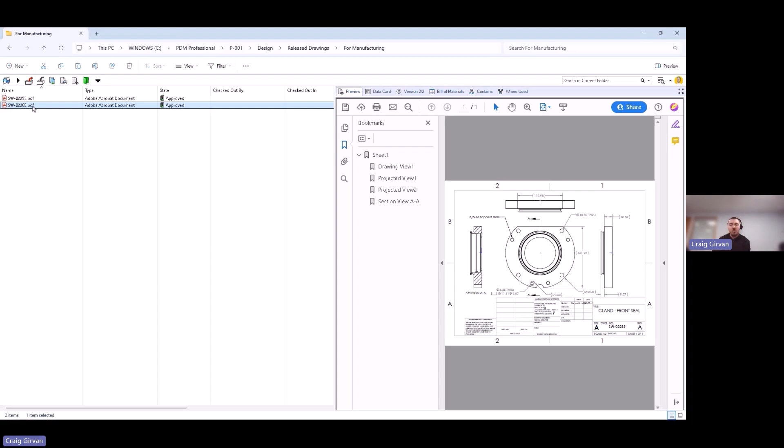They will only see the information that's specifically in that subfolder that you've granted the various different permissions to. So it gives you a little bit more granular control if you want to use folder permissions to control who can see what type of files, based on where they're saved across the different folders.

For those of us with PDM Professional using the Web 2 side of things, we'll have a slight enhancement to be able to see all of our different bill of materials information. So if we log in to our Web 2 client, go to a file of our choice, we can now start to see all of our different information inside here, whether it be in our bill of materials format or just maybe a properties window on the right hand side.

If we are looking at a bill of materials, we can actually change between our various different types of table. So obviously if we had any weldments or sheet metal stuff, we could also have potentially cut lists in there. And we can also toggle between the different configurations and see what did this BOM look like at a previous revision or a different configuration, that sort of idea. We can see all of that in the Web 2 side of things.

For those of us that are using the various different types of convert, which might just be the simple task of converting a drawing to a PDF, or we could be converting a part to a step file, pretty much any of our file types.

If we're outputting as a parasolid, we'll now have some updated file types. Same with STL files and step files, they've been updated to slightly newer versions of those respective files. We will also now have some additional options when it comes to outputting the file, with more control to customize the scripting of those tasks.

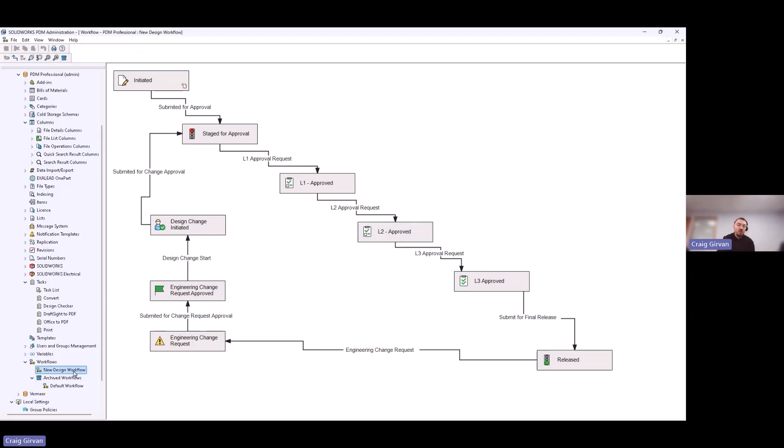We also have some changes to the setup of categories. If we're setting up a category to use in our workflow properties, it will now default to using the file path option, which was probably used the vast majority of the time, so that will just be the default rather than having to pick it every time.

You will now get a warning if you try to log into the PDM administration tool when someone else is already logged in. That way there shouldn't be any fighting over changing permissions or tweaking things at the same time. You'll get a prompt, and if you need to make changes, you can let the other person know so they can log out.

We also have a new progress indicator if you're using Windows logins for PDM, synced to your Windows Active Directory. If that sync is in progress, hovering over any of the users or groups options in the admin tool will tell you that sync is in progress.

We also have some options to control what file types work in that preview. We showed the preview using eDrawings to see step and parasolid files, but we could change that to just use a basic image as the preview, which will help performance. You can now set this based on groups of files—for example, show the image preview for SOLIDWORKS files, and the preview for Office files and neutral CAD files.

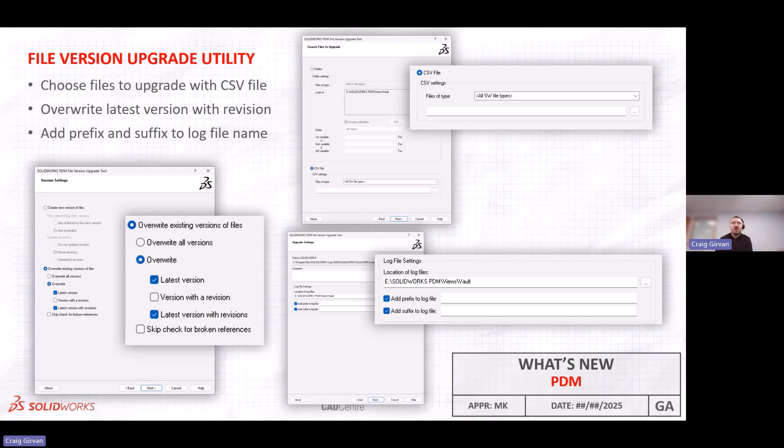And when we are upgrading, we can choose whether or not we want to overwrite things like the revision or the version, so that the file version upgrade tool doesn't necessarily create a new version of all the files in your vault when it's doing this. We can just overwrite the latest version so that that's the latest one in there.

We'll also now see a slight change to the behaviour when we go to update things like our hole wizard or toolbox folders. If we've created any sort of custom API triggers to run when certain things happen, we can now temporarily have them disabled so that they don't cause any kind of issues when it comes to upgrading, that sort of idea.

We also have a change to the encryption, so it's now using AES 256 encryption between the client, i.e. the users, and the archive server, just for better security in there.

For those of us using Windows login, we now have a change, which technically can happen from 2025 SP4 onwards, although because this is more on the IT side of things, it's something enabled via a Windows registry key, done on the server. So if you want to start to enable this, maybe get in touch with us before changing it, but we can now use the slightly different Windows authentication methods for that.

That pretty much finishes it for the PDM side of things.

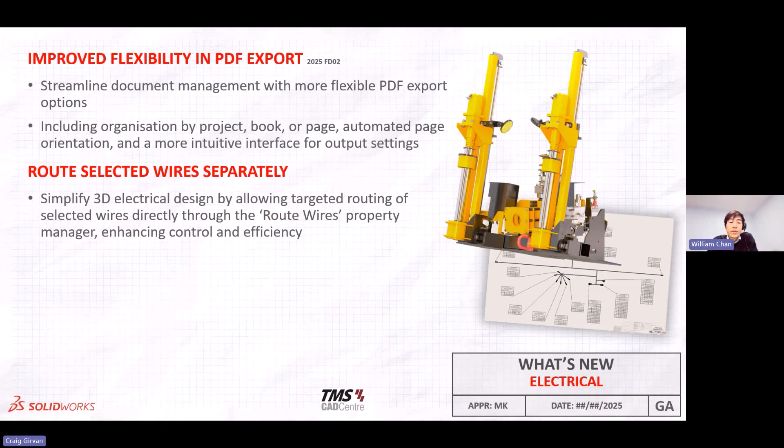So for SOLIDWORKS Electrical, we now have a simplified entry for repeated values for circuits, terminals and cable cores when using the manufacturer part or cable reference import. There's a streamlined user interface for the dynamic connector insertion command, as well as the ability to assign accessory parts. We also have more flexible PDF export options, such as organizing by project, book or page. You can also route selected wires separately through the route wires command.

We have quick tooltips to show electrical design detail for each wire or cable when highlighted. We've also added batch defined stub lengths for all pins in a single operation, and finally, enhanced electrical connector tables with easier connector identification.

Let's have a look at these in action, starting with part reference import. The new Excel import option was added back in 2024 SP3. With this initial release, the value for every terminal for every circuit had to be entered manually with the appropriate delineators. In 2025 FD02, you can now enter the repeated values only once, for example the minimum number of wires or maximum and minimum wire size. We only have to enter those values once, and when we import the Excel file, SOLIDWORKS Electrical will apply that value to all terminals of all circuits.

Now we'll look at improvements to dynamic connector for 2026. First we'll insert a connector. In the dynamic connector insertion command, we now have an expand button. This new expanded user interface contains selection filters to aid the selection of circuits and terminals to insert with your connector symbol. This is especially handy for connectors containing a high quantity of pins.

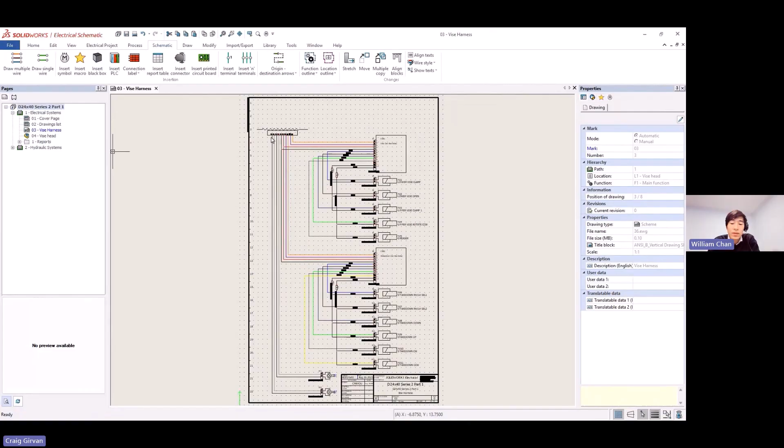Next are accessory parts. This enhancement was released in 25 FD01 with the component properties. We can now assign accessory parts to circuits and terminals on our base part. Simply select the accessory part, the circuit or terminal you want to assign this accessory to, and then click Associate. You can also right mouse click on the terminal and select Associate, or drag and drop the accessory to the terminal or circuit. Once we've created that accessory, you can create a connection label, and you can see the additional properties inserted with our label.

Export to PDF. In 25 FD02, there are some new options for exporting to PDF. Within the structure drop-down menu, we have exporting PDF by project, book, or page. There are also new defined document naming options, for formulas with options for folder name and file names. Our last option here is the orientation with the automatic option. This is now added to allow the PDF to have different orientations automatically rotated within the exported PDF, so you can see we have the varying orientations for landscape and portrait drawings.

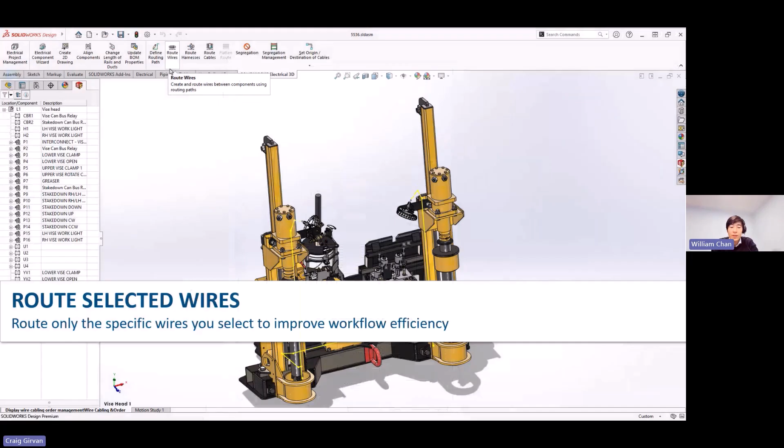Next are route selected wires. In this example, we want to route the wires to the lights to make sure they fit in the provided holes for a support structure. We want to use this new feature, which allows you to use the selected wires within the route wires command. This option gives you the ability to route individual wires from your project. This new option is great for checking fit while still working on your design, or for better control of where your wires are routed for specific design functions.

Next are connector tables. This enhancement is for electrical routing drawings. In 2026, we now have additional route properties for displaying within your connector tables. With this new route property, you can display, for example, the connected-to connector property, and as long as the values are in the from-to list, they will be displayed. These new columns can be updated to all tables in the drawing as well, saving you time.

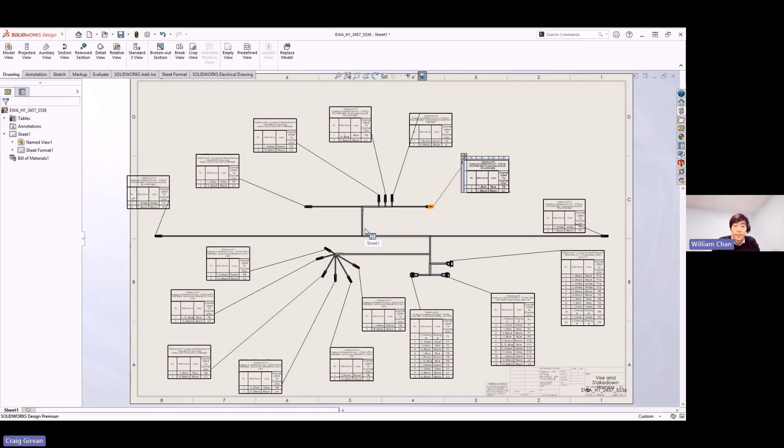Some other enhancements include more advanced cables and core filtering, the new switch cable cores command, and direct navigation to schematic and component browser from the cable management window. These all can help with managing your cables more efficiently. There's now also the option to hide any unused or default system classes to simplify the classification design tree, allowing you to organize and find your components much easier.

Next, we also have enhancements to the update and replace data commands. A warning message now displays when you update symbols, manufacturer parts, or cable references that have discrepancies. These discrepancies could be, for example, the symbol has more connection points, the number of circuit terminals in a manufacturer part is higher, or the number of cable cores in the cable reference is higher.

Another enhancement is to the collaborative server. This provides more reliable performance through optimized client to server connections, as well as better compatibility with modern IT environments. Now only the server firewalls require incoming ports to be open, and all communication is initiated from the client side to eliminate server to client connections. This reduces firewall complexity and enhances network security.

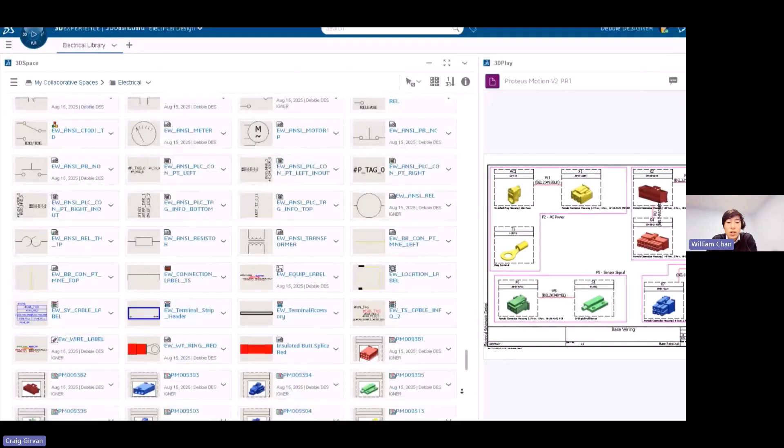Let's have a look at these in action, starting off with electrical library on the cloud. This new feature introduces a streamlined process to save all new and modified local library data to your 3DEXPERIENCE platform, improving efficiency and ensuring data integrity across collaborative spaces. There's now one unified dialog to manage all library save operations, and we can also see a report summary showing which objects have been successfully loaded, as shown here. We also have the load and reload library commands within the dialog.

Next is the new electrical 3D role. So if you have the SOLIDWORKS design role with the named user license on the 3DEXPERIENCE platform, you can now also get the electrical 3D role to allow you to essentially access the electrical 3D add-in. This allows you to bring your 2D schematics into your 3D and generate your electrical routes based on your schematic drawings. This integration ensures that both electrical and mechanical teams can work from a single source of truth in a cloud-connected environment, reducing errors and improving overall design quality.

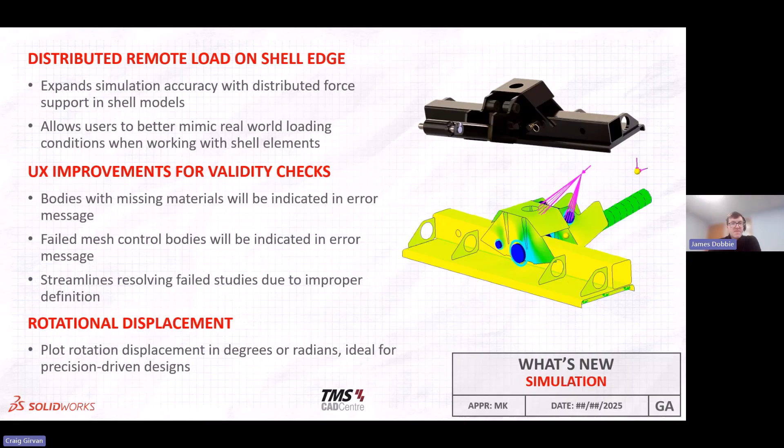There's also some options for picking the default shell type. Previously, when defining a shell, you could pick thick or thin, and it would always default to one of them. You'll now have the option to define what that default should be. So if you use one more than the other, you'll be able to apply that there.

Also for pin connector forces, you're already able to extract them across various studies. The addition of random vibration studies has been added to that, to extract the various forces and torques from the pins.

So in this case, for a lot of simulations, we're just going to be looking at our Vermeer model, and we're going to be looking at sort of the worst case scenario - in this case where we've got the loads of it, obviously the weight of it pushing down, as well as the thrust of it pushing the various piping into the ground.

And in this case, the supports will be at 2 points - the front of the tracks and on the outrigger. So looking at this outrigger, we'd obviously want to make sure that it's nice and secure and it's not going to fail and cause the machine to fall over or lose its position. So we want to simulate this to minimize the displacement.

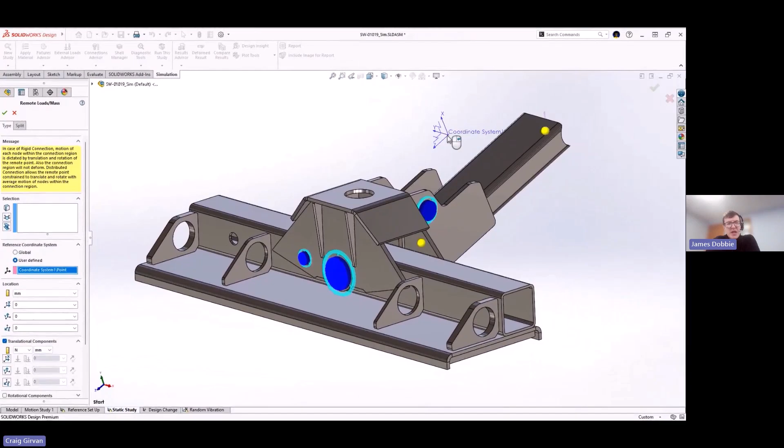So in order to make sure we've got a good realistic setup, we're going to use our various enhancements for this one. The first one here is shell edges - I want to apply this remote load to the shell edges. Previously I would have had to use a split face command and apply it on the actual face itself on the side of it. Now I'll be able to just apply it directly to those shell edges to make sure I've got as realistic a setup as possible. So here I can now apply those and that will solve all nice and easily for me.

Next thing we're going to look at here is the feedback warnings for when you've got some errors. In this case, one of the bodies does not have a material applied to it. Previously it wouldn't tell you which body that was the case - now it will list the body, and we can just copy that and pop it into the filter in the tree and see that body nice and easily, where we can then apply that to it. So it just makes setting the assembly up a lot easier in simulation, where you have maybe multiple bodies and one's missing a material. Rather than having to hunt through that manually, you can let the simulation tell you exactly which one it needs applied to.

Displacement plots here - so now what we'll be able to look at is pull out displacement in radians or degrees. It's just a case of defining a new displacement plot and then picking in the drop down, rather than the displacement in X, Y or Z directions, we can pick the rotation about the different axes, and we can have those output. It's a nice little option - you don't need to manually calculate them or anything. We can just have them directly output in the new displacement plot option there.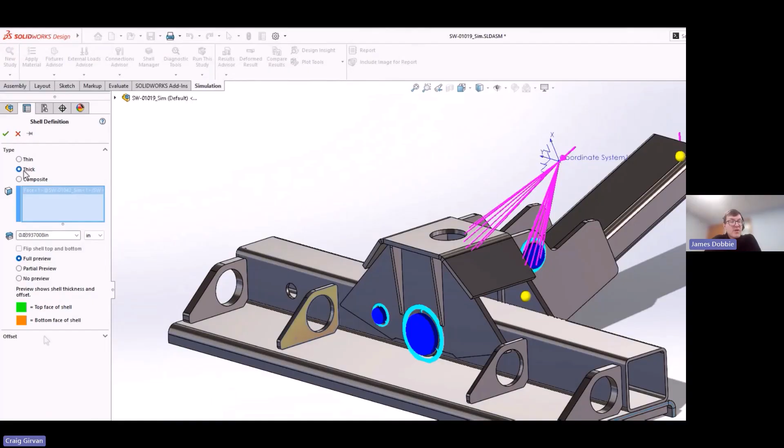Shell definition - this is just the default option here. For define, it defaults to thin, but if I'm basically going to be doing a lot of thick shells, then in the simulation options I can open that up and pick the default shell type, so I can switch it to thick and have that used instead. Now when I go and define the shell, you can see it defaults to thick and I don't need to change that. So it just saves you a click every time if you're using one more than the other.

Pin connector forces. Here, in this case, this is just a random vibration study that's been run. Previously, we wouldn't be able to extract any of the forces for the various pin connectors. Now we'll be able to do that. We can list those connector forces and get all the various forces, shears, torques, bending moments, etc. out of all of those connectors. This is a nice handy little thing we can do - we can extract it from the connectors, whether it's all connectors or specific connectors. We can also plot these in a response graph.

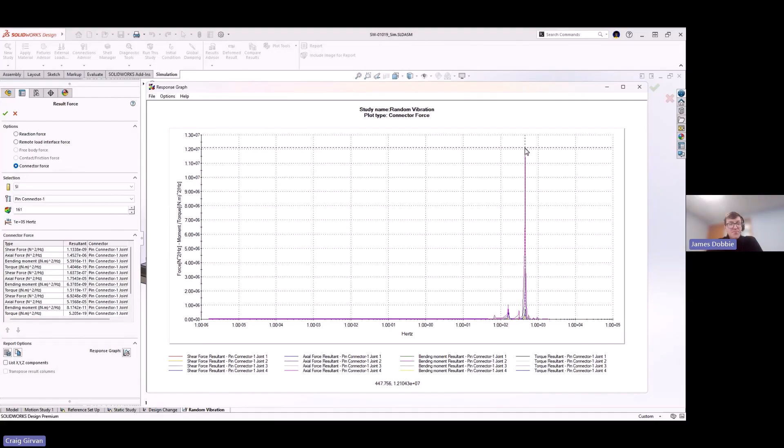Obviously, when it comes to running vibration studies, there might be certain resonant natural frequencies where the forces will expect to peak. We can easily find those from a response graph and find what those peak forces are and where they occur.

Moving on to things to do with seismic studies and beam studies. First, we'll now have more options when it comes to defining loads on beams. Previously we were a bit limited on how we could apply forces in terms of distributing loads across multiple beams. Now we'll have the option between per item and total. When applying the load on these beams, we can say per item, and that will apply that same load across each beam. Total will then distribute that load across all of the beams. We also have the option to do per unit length - so if you have a certain load per length, we don't need to figure that out and apply different loads per beam. We can now just apply that with one easy tick box.

Next is the seismic response studies - we're now able to define remote masses, so we no longer need to model lumped masses to put on top of this. If we're going to have a mass applying on this, all we need to do is apply it, position its center of mass, add how much the mass is, and apply that and run it. This saves on having to create that geometry as well as mesh it, making these studies a lot more efficient to run and quicker to set up.

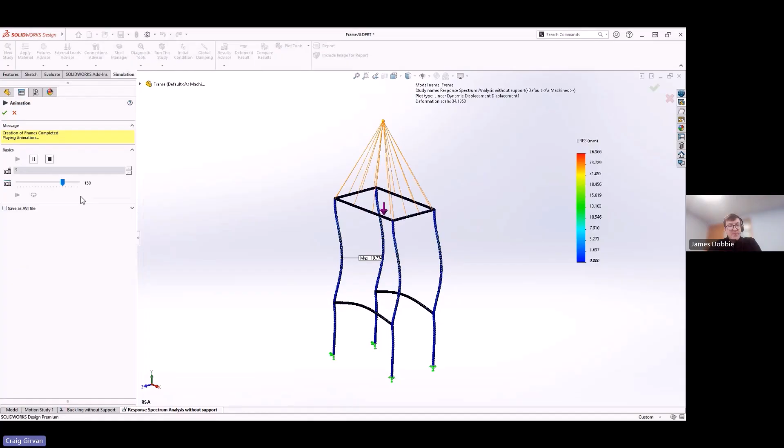Next, when it comes to buckling studies, we can now filter out the negative eigenvalues. Previously, if you asked for 5, you'd just get the first 5 whether they're positive or negative. You'll now have the option to say only extract the positive buckling factors. So now when we run that, we'll only have those first 5, which saves you having to increase that number if you're looking for only positive buckling factors.

Now, some performance improvements with connectors. Simulation runtime has been improved for studies, particularly with lots of connectors. You'll see that reduction in time it takes to solve those. Handy, since you're already using connectors to speed up the analysis - this will speed it up further. So it's a nice little improvement.

There's another fix for a quite specific issue. In SOLIDWORKS 2025, if you had a connector with more than 800 edges in the mesh on that connector, it would fail to run, which would obviously require a rather refined mesh. But now with 2026, that will be able to run without any issues. So if you are running very refined meshes, you'll no longer run into any potential issues with connectors.

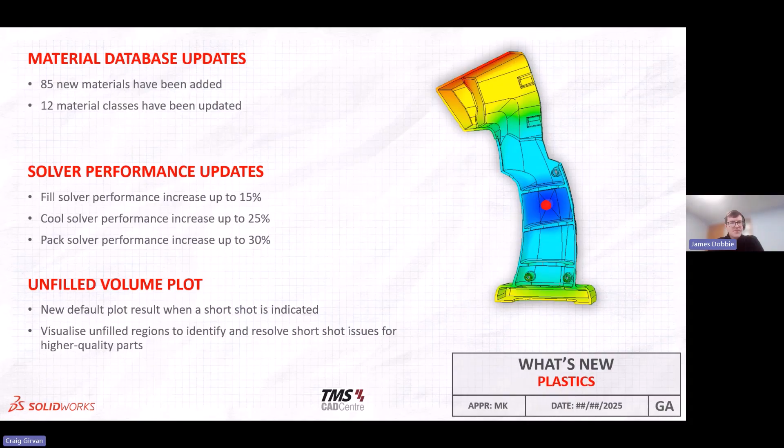Continuing on to look at the plastic injection molding simulation, we'll see what's new. Some enhancements include more materials added, performance improved across the board for all the various study types, and a new plot for the unfilled volume. There's also been improvements to the air vent analysis, as well as some adjustments for thermosetting studies. Let's take a look at these in action.

Plastics has an extensive material library with lots of various polymers. There's been enhancements to the materials, with more materials and more material classifications added. There's a full list of those, as well as enhancements to performance for the various fill, pack, and cool simulations, so they'll all run nice and quickly.

Here's the unfilled volume plot. Previously, if you wanted to see what parts of your model were not filled, you had to look at the fill time and then look at what was grey. On more complicated geometries, it might be harder to see exactly what was unfilled, or you might miss some parts. Now with the unfilled volume plot, the unfilled areas are highlighted in grey and the rest of the model is transparent, making it easy to see exactly which areas have not been filled by the plastic injection molding process.

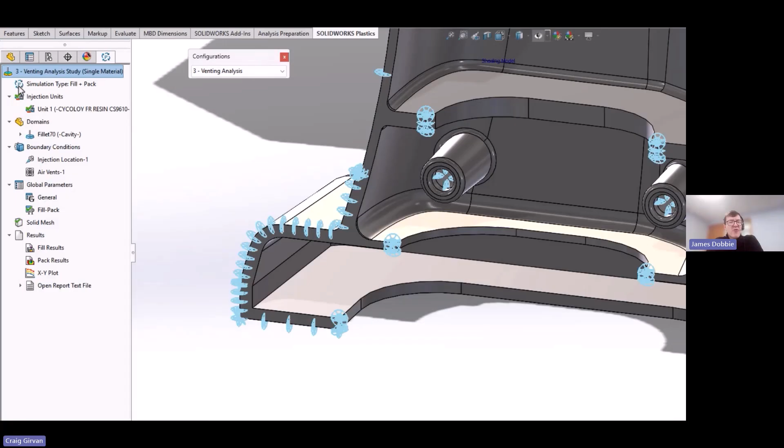The air venting analysis: previously, when doing air venting, you could only select vertex points. In this case, we can see we've got some unrealistic pressure results from that. With the new options, we can pick the edges to more realistically represent how those air vents would be. They wouldn't be just infinitely small points, they would have some size along the edges. So we can now pick those edges to be the air vents, and when we run the analysis we'll get much more realistic results. A nice little improvement there.

Thermosetting materials: you can now set the parameters for solving based on the curing at the ejection time. With the criteria, we can do curing or time based, and here we can set a target for curing at a specific level. Now when we run it and look at the results, we can look at the curing at the ejection point and filter based on that to see, okay, at 80% curing, basically all of our model has cured, and it's just the runners that are not cured at that 80% level when we're ejecting it.

So that's the plastic sim. Flow simulation, let's look at the enhancements for that.

With flow simulation, the first enhancement is the surface source. You'll now be able to summarize all the same surface sources and group them. So if you've got surface sources with the same power output, they'll be grouped together in one bubble with several leader arrows coming off it. This makes it a lot easier to take a look at your model, and you'll have a lot less duplicated labels.

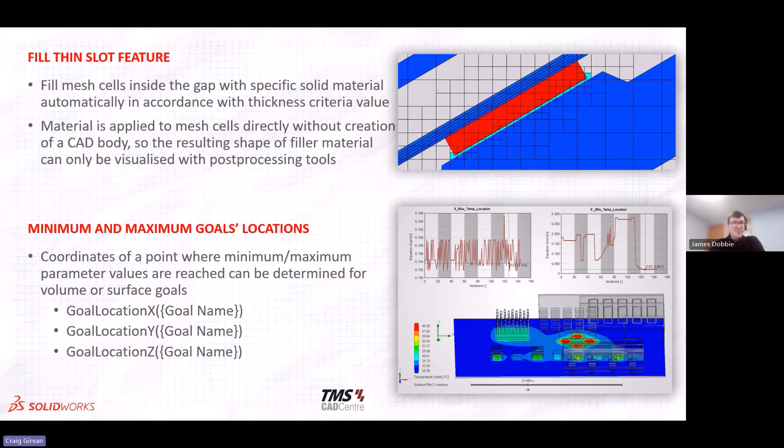Parametric studies now have a new bubble chart that will allow you to easily visualize lots of different parameters. You've got your two parameters on the axis, color gradients, and the size of the bubbles, so you can visualize all those differences nice and easily in the bubble chart.

Also, when running a parametric study where you have a lot of parameters set up, you'll now be able to pull them from the submodels. So if you have components that have already been set up with parameters, you'll no longer have to redefine them. You can pull them from those submodels, which just saves setup time and improves consistency as well.

Component status has been added to the component explorer, allowing you to toggle components on and off nice and easily without having to go into any other windows to do that, as well as a new temperature status added to the component explorer. So if you wanted the temperature of any of the volumes, rather than having to set up goals for every single body, you can now just explore and see those in the component explorer.

So that is the enhancements there to flow simulation. What I'll now do is pass you across to William, who's going to look at DraftSight.

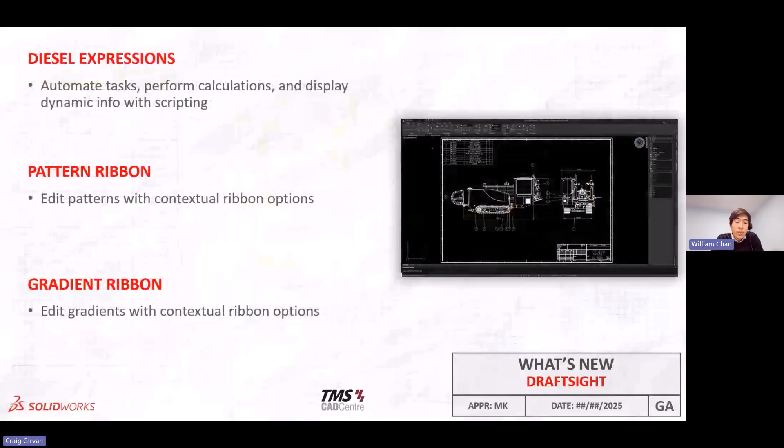In DraftSight 2026, we now have a start page to show recent files, favorites, and learning resources in one place. We have power tools to streamline workflows, as well as floating windows to allow display on multiple monitors. We also have diesel expressions to automate tasks with scripting, pattern ribbons, gradient ribbons, importing large ECW files, and finally the BIM module to import Revit and IFC files to generate 2D floor plans.

Let's have a look at these in action, starting off with the new start page.

This is available for DraftSight Premium, Enterprise Plus, and Mechanical, and this appears when the program launches. It centralizes key tasks like opening recent files, creating new drawings, and accessing templates. It also integrates learning tools, product updates, and quick links to online learning resources, all directly within this one interface.

Next are Power Tools. Power Tools enable greater efficiency with its full suite of 43 automation commands. For example, with the pattern hatch tool, we can choose a custom block. Once we choose our block, we can essentially turn that into a hatch. In the past, you may have had to create hatches manually, but now with this Power Tool, it is much more convenient to apply a hatch to your drawing. The hatch pattern can be customized, for example you can adjust the scale factor and size.

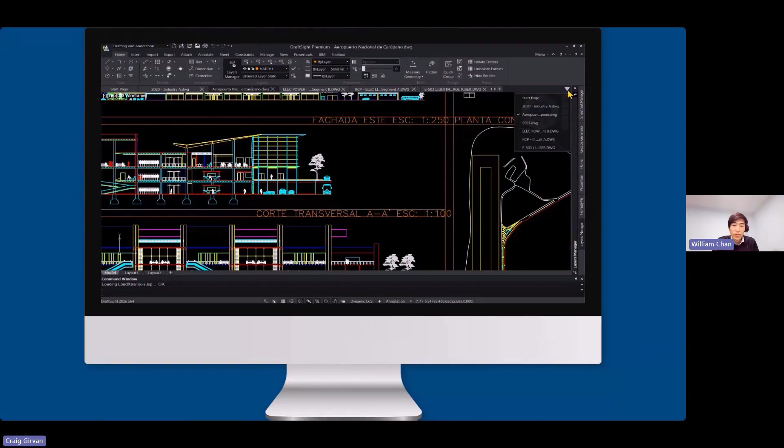Next are floating windows. The new floating window feature lets you drag drawing tabs to another monitor, giving you freedom to work across multiple screens. This can boost your productivity by viewing, editing, and referencing different files side by side for a faster and more efficient design workflow.

Next are diesel expressions. Now, this is not the diesel you know that you put into cars. Diesel here stands for Direct Interpretively Evaluated String Expression Language. It is a string-based macro language that can dynamically generate text, especially in menus, status bar entries, and custom commands. For example, it can allow you to extract dynamic data from drawings such as file paths or names without having to rely on external Lisp routines.

Next are pattern ribbons. Previously, you may have created a pattern and then used the preview and undo command to undo the pattern, essentially having to keep flipping back and forth between dialog boxes. Now you can dynamically adjust the spacing, count, and layout of patterns without having to switch between the preview and undo commands. This streamlined layout makes creating and editing patterns a lot easier.

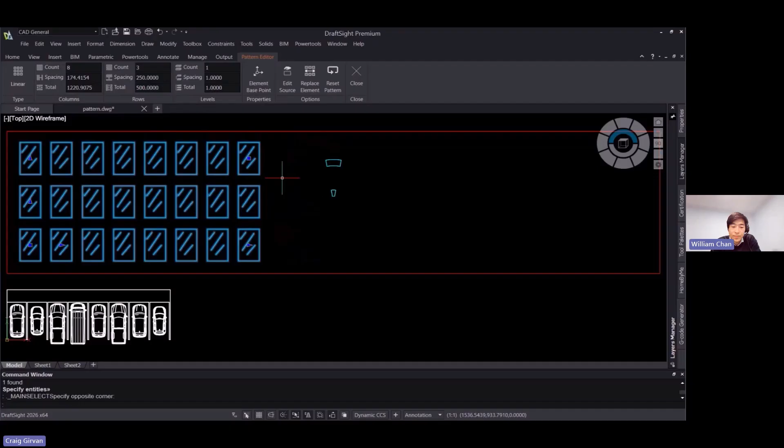Next are gradient ribbons. Similar to the pattern ribbon, there's now an interface for gradient hatching, allowing you to apply a gradient to your drawing and change the color and layering dynamically. This makes it much easier to visualize the changes that you are applying in real time.

Next are attaching ECW files. ECW stands for Enhanced Compression Wavelet, and these files are commonly used for satellite maps and aerial photography. These can now be imported into DraftSight 2026. For example, we can take a crop sample of this satellite image here, then scale these images using recognizable elements such as this car park. We can then insert a block from our library, such as this car, to validate that it is indeed scaled correctly.

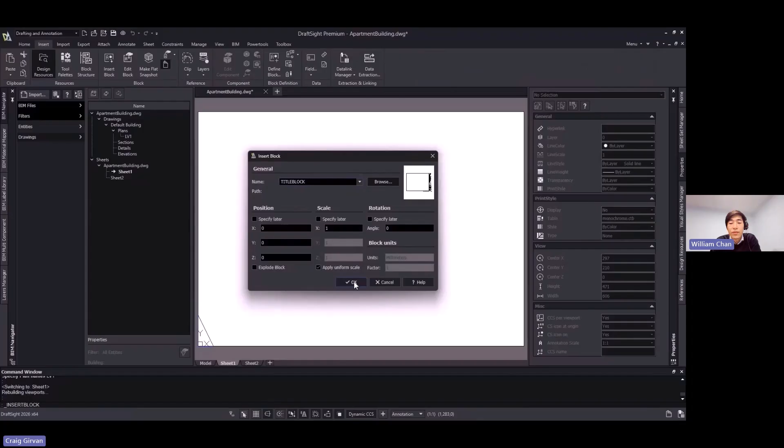Finally, we have the BIM module. The BIM module was introduced in DraftSight 2025 SP3 and has been continuously improved in 2026 as well. You can now import Revit and IFC models, which allows you to take floor plans, elevations, and material takeoff lists directly from the imported BIM data. Importing these models also retains a link to the file, so if the original BIM model changes, you will also see the changes reflected within DraftSight, enabling real-time collaboration.

And that's what's new with DraftSight. I will now move on to Composer.

The next enhancement is also the support of multiple image formats for videos. So up until 2025 only bitmaps were supported, but now you can use bitmap, PNG, JPEG, and TIFF image formats for animation frames while creating videos using the Video Workshop. Generating videos is easier and faster now, and you can use these image formats for MP4, MKV, and FLV output video formats.

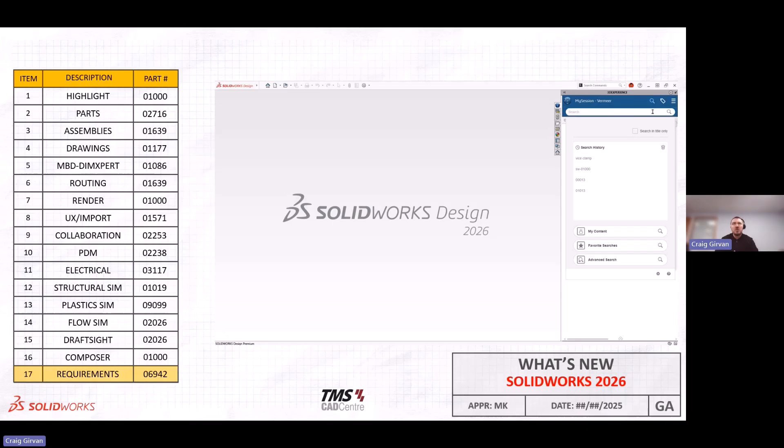Alright, that's that, William. So what I'm going to do to almost finish us off is talk a little bit about some of the requirements for SOLIDWORKS 2026, and also a slight name change you might already see from the preview image.

Windows 10 is no longer supported by Microsoft; that ended in October of last year. So most people are going to want to update to Windows 11. For SOLIDWORKS, Windows 11 officially started support with SOLIDWORKS 2022 SP2. So if you are looking to update to Windows 11, or maybe just recently updated by your IT, then normally you want to be using SOLIDWORKS 2022 or newer. That doesn't mean those still using older versions of SOLIDWORKS will stop working if you stick with Windows 10 - you just may not get security updates from Microsoft, but it will still technically work for the older versions of SOLIDWORKS.

So if you're wanting to go to SOLIDWORKS 2026 or newer, when 2027 comes out at the end of the year, you'll want to be on Windows 11 for the user side of things.

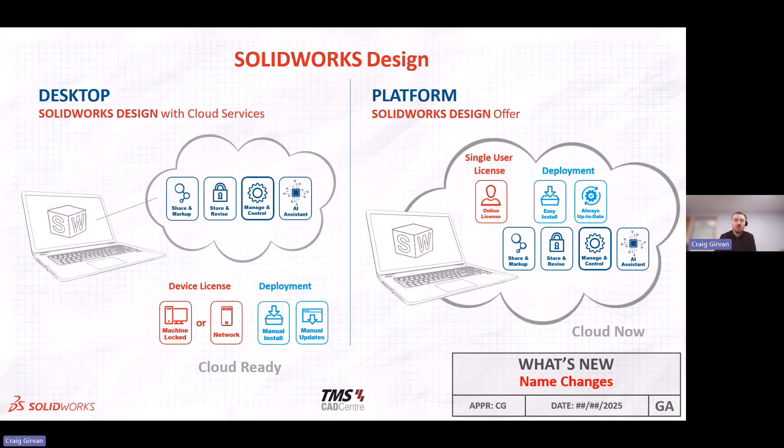On top of either option, we can add more 3D Experience features. On the desktop side we'll usually go with cloud services, so if you've bought licenses recently or going forward, they'll generally come with cloud services and all the enhancements that come with that. Those will automatically be built into the 3D Experience platform versions of SOLIDWORKS Design. So generally we'll have SOLIDWORKS Design with cloud services, and SOLIDWORKS Design offer for the platform. You'll still have your Standard, Professional, Premium, and technically Ultimate tiers — four different tiers of SOLIDWORKS you can purchase and use.

That pretty much finishes off most of the content and gives a little summary. I'll pass it back to William, who will close us out.

Thanks Craig. So we've now reached the end of our launch event. We hope you enjoyed the things you saw today. There were loads of features and enhancements to help improve productivity and collaboration. Some of our favourite enhancements include the one from PDM, transfer ownership, which allows you to keep files synchronized across machines with changes from other users.

Another of our favourite enhancements is a simulation one — the new loading option for beams and shell elements, which expands simulation accuracy with distributed force support in shell models and allows users to better mimic real-world loading conditions. And finally, our last favourite enhancement is Aura, the new AI assistant.